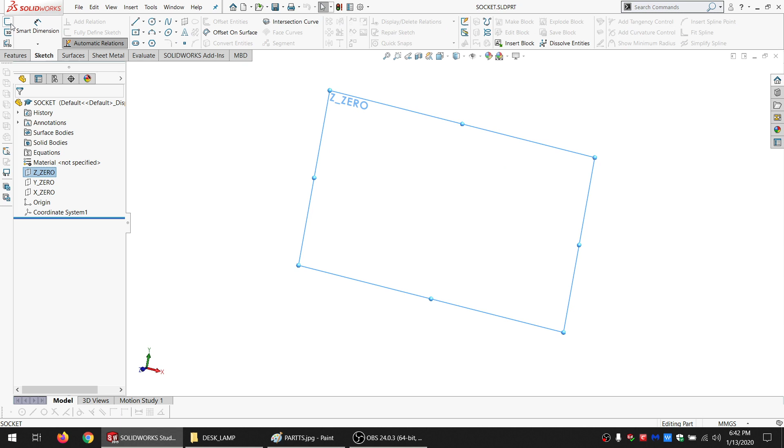This might be sort of a boring video in some ways because you won't see half of it because I don't have a good webcam. But it's obviously round, and it's 35 millimeter diameter on the outside.

And on the inside, how big is it there? It's 28.75.

All right, and gonna just extrude this. I think we go the other way. And how high? 38.6.

And I'm going to put a cap on the end of that. Offset from the surface. Doing this just because that's how calipers work. It's easier to just measure the depth of it.

That's 26.4 deep. Okay, I don't have to get super detailed. I mean, I'm not going to bother putting the threads in there and all that.

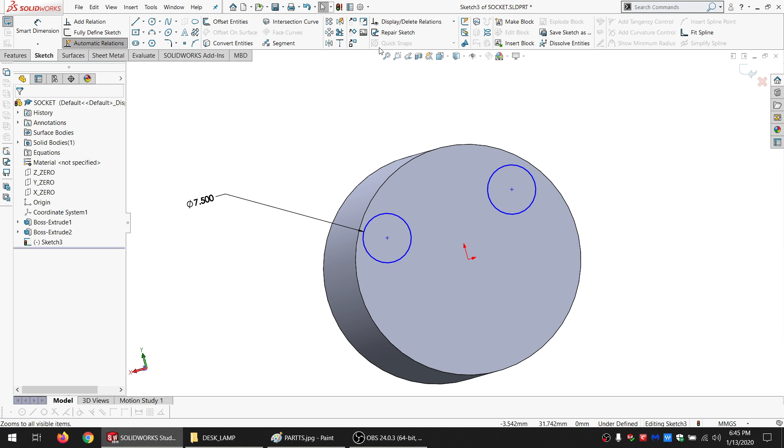And how are they arranged? Really hard to say. No, they're so oddly arranged, I'm not even going to bother with them because honestly, I don't need to model them anyway. If I was going to use this for other things in the future, I'd probably do that, but yeah, there's really no point in modeling that because I don't need it for this project and I only have one of these, so whatever.

So just going to draw the basic shape of the bracket that's coming out of the bottom of it. It's used to actually mount it.

And let's see, I do not have an angle measuring gauge that's going to fit this. It's kind of inset a little bit, yeah.

Sometimes the hardest part of designing something is just measuring it. So how thick is this? 3.32. And how thick is the top? 1.57.

It's parallel, and so it's going to be parallel with that. Okay, and how to model this exactly.

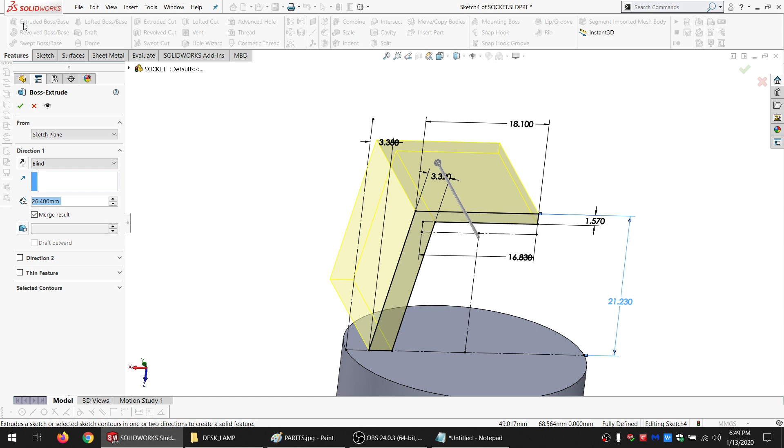Everything turned black, which means it's fully defined. So I'm going to do an extrude boss. The most narrow part of this is 8.6 millimeters, and it's going to use a mid plane so that it goes equally in both directions.

I'm going to go up here and make a circle. I can show this sketch so I can use what I had here, so I'm just going to convert that whole thing and make it for construction. I can use coincident, coincident, and coincident. That's the overall outside bit of it, and I can just do an extrude boss up to here. That's pretty much the shape.

I'm going to trim it—it's actually rounded at the end here, so I can just convert this whole face and make this coradial, and then start trimming and get rid of that, and make that coradial again. If I do this right now, I think SolidWorks is going to freak out because it's zero thickness right there.

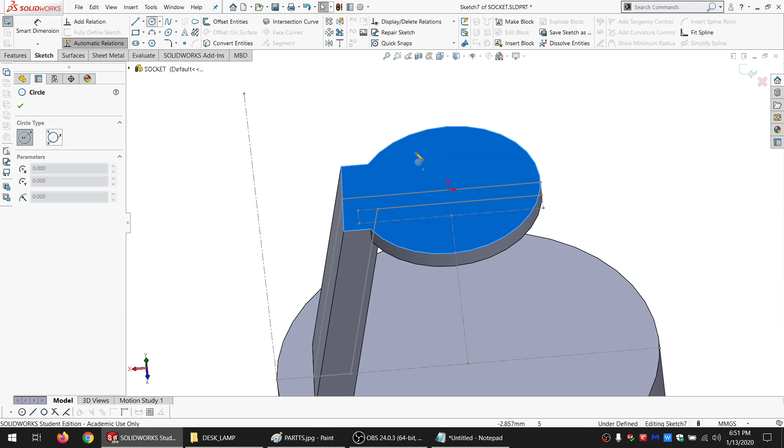Then on this surface, there's another raised section that's got threads. That's centered. How big is it? It is 9.71. And it's not actually completely round—it's flat on each side, which I could just make a round hole, but I might want to actually use that.

So I'm just going to draw this in and make it for construction. Basically I just want to take down my measurements at the moment, and then I'll worry about what I actually want to make useful lines out of. So it's 0.44 wide there. Basically, if we take the trim tool, trim that, and put those back in.

And then there's also a hole through the center of it, and it's 6.4. Then we just have to see how tall it is—0.66. Okay, so that's what that is. That hole also continues through, so I'll go ahead and do that too.

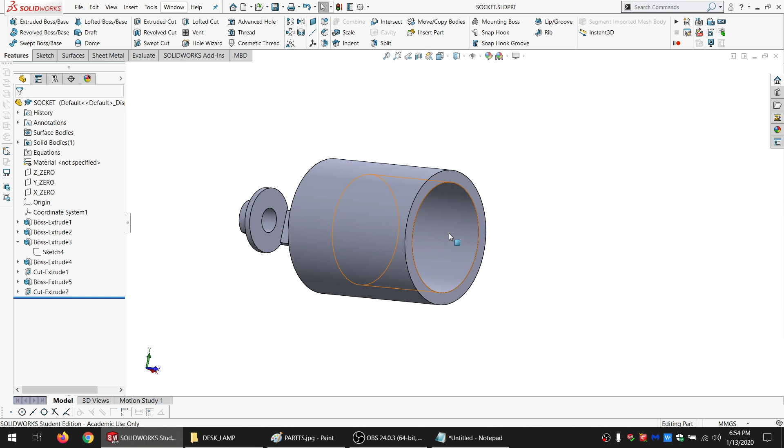I'm going to include the light bulb right in here because, frankly, that saves me the trouble of modeling the threads and figuring out how deep the light bulb is supposed to go into this particular socket and all that stuff. If I draw on this plane, which I modeled all centered around the origin, that makes it easy—I don't have to make extra planes for this. I can just kind of draw out the shape of the light bulb.

I'm going to start with just the center, kind of a center line of the light bulb, and go over, up, out a little bit, and let's see. Then it looks, just from what I can see, kind of like that, and so it curves out and then it curves back in. So that's very rough, but that's what I'm looking for.

I'm going to put in a couple extra lines for construction right away. This one's going to be actually horizontal—make this horizontal as well. Make this a vertical construction line. Make these equal because it doesn't really matter what they are; I can just pick a random line and make them equal to it. Not always the best practice, but I know that line's going to stay there because I'm not really going to mess with this too much.

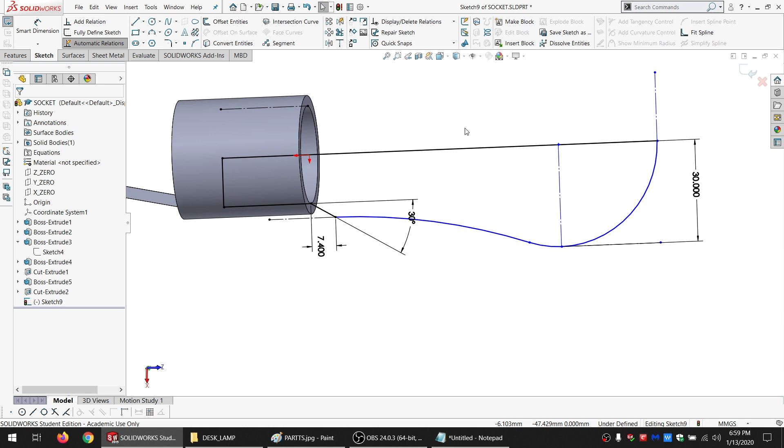And then we should probably have the entire height of the bulb, which I'll take out of the socket for that. And it's about 86 1/4.

And then that's fully modeled. So I select the center line, go to revolve boss base, and I'm going to not merge this. I have it as two pieces in case I'm going to separate them later. Maybe I'll pick a different bulb, but I think I'll go with this bulb.

So yeah, that's basically what I'm going to be putting in. But in addition, let me go ahead and save. Down here, this is actually threaded, but I didn't model it that way because there's really no point. I just need to know how big of a hole to make for it to go through. But I am going to model up the nut, and that way I can at least remember to deal with that.

So I can just make a polygon, 6-sided, and grab the inside circle, and that will be the distance of the flats, which is easy to measure. 13.81.

And we'll center it, and just say horizontal, good enough. I'm actually going to start it from here, but I'm going to go the other way. And it is 3 thick. And I don't want to merge this.

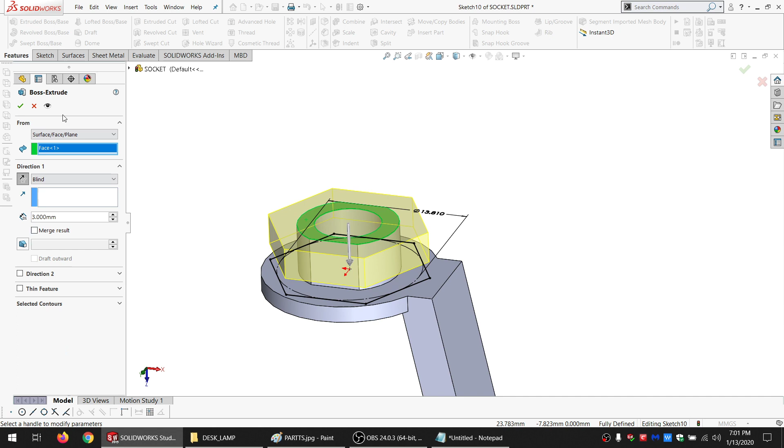And okay, then I'm going to go back in the sketch because I noticed that I only did the outside. I need the hole in the nut too. So again, not going to bother making it threaded or anything, just good enough for the modeling. That's all that really matters on this.

There's also a washer, but it's thin, and I don't even know if I'll end up using that. So I'm happy enough with that. I'm going to rename it.

Okay, so got our inputs. Might still need to do a measurement or two on the cord for a hole to slide it through later, but that's good enough for the time being.

So now I have to figure out how I want to use this. For starters, I'm going to make a new part, and I'm going to save it right away. Call it—I like to always go ahead and start putting version numbers when it might be something that gets changed a few times.

And I'm going to insert part. This is kind of like an assembly the way this works, but not exactly. But it references that other part, unless if I right click here, click external references, I can either lock it or break it, or I could just—yeah, there we go. But for now I'm just going to leave it.

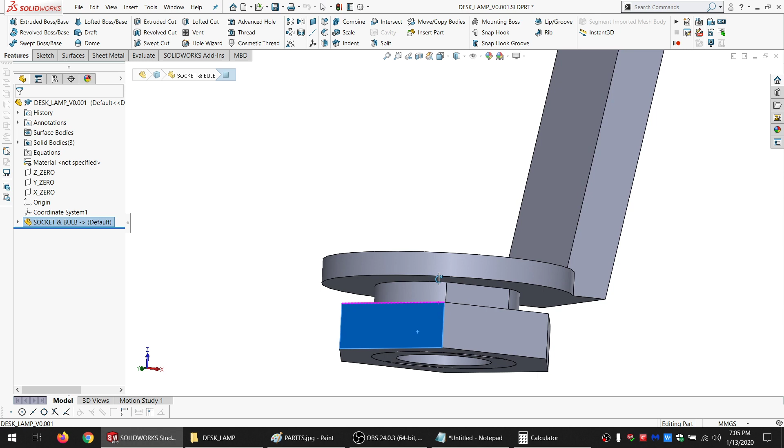So how thick is it, how much distance do we have? We don't have a whole lot, so that might be tricky. Let's see, 6.4... I like to work metric, but 6.4 is just a little more than a quarter inch, I believe. So it's just a little bit over a quarter inch. So if this nut doesn't go on because my material is too thick, that's not a big deal, because I can just run a quarter-20 screw through there with this and use that instead.

So let's start modeling here. I'll do a sketch in this plane. At this point I have to start deciding: do I want it to be square, or circular? Circular gets a little hairy sometimes, and if I want flat sides but not square, especially with laser cutting, which this is going to be, it gets a little iffy. With the fingers, they don't have that problem—they're always cut at 90 degrees because that's the only way you can cut things on a laser, so they don't fit well if you've got angles that aren't 90 degrees.

But at the same time, I don't want this to be just a boring square. So, you know what, let's make it a lucky... and horizontal. Actually, I take that back—7 is not a great number for divisibility, 9 is a good number for divisibility. Let's just pick a random one and make it horizontal so it can lock down later.

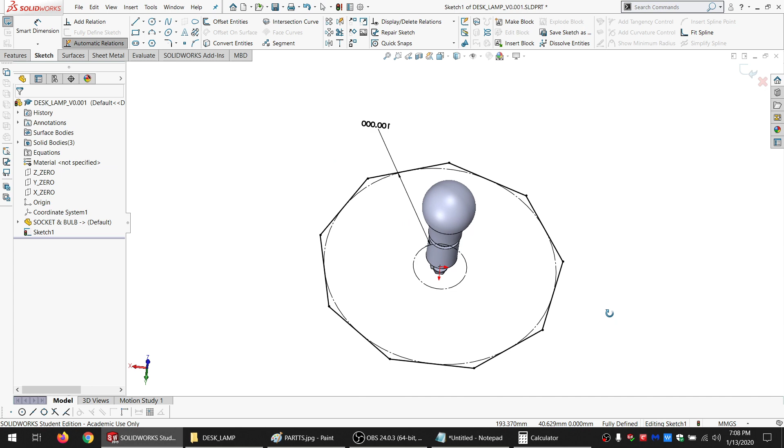But why not? Let's make it a little bit bigger—a lot bigger, why not? 260, which is a little over 10 inches if you prefer. Yeah, I think that should come out well.

I'm going to grab these 4 parts and do an intersection curve, so I get that shape for the center, and can add things into the sides later, but we'll just go ahead and extrude this for now, set equal to wood thickness, and I don't want to merge it. And it's not happy—even though it generated the syntax of that equation, it's still not happy.

Why is that? Because sometimes SolidWorks just does that. So I'm going to save, close SolidWorks, and then open SolidWorks again, and basically hope that error didn't mess up my part. That happens sometimes. Come on, SolidWorks, you can do it. Let's see if it lets me do it now. Syntax is incorrect, which it's generating the syntax for me, and it's perfectly fine—it's just giving me an error for no good reason. Hooray.

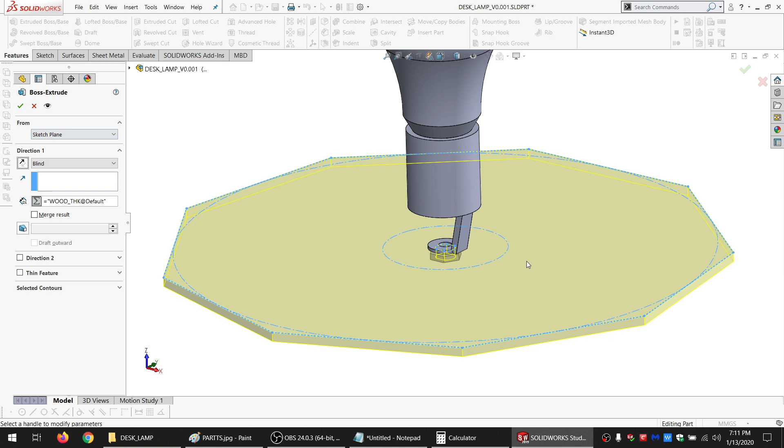Try removing the external references—sometimes that fixes it. Do a few control Qs, save, extrude, equals, and then it's happy. Where'd the error come from? I have no idea, but it's gone, and that makes me happy. So this is not merged—wood thickness going down, so it's not interfering with the metal part. I pretty much buried the nut, and as I modeled it, it's as far off as it could be, so that nut's going to be unusable. I'll just have to use a quarter-inch screw with a washer to hold it. That's fine.

Let's see—we want the bulb, ideally, to be about midway up the lamp. That seems logical anyway. So how do we make the center of the bulb midway up the lamp? What we can do is use planes. We want this to be parallel and tangent, and then make another plane that's also parallel and tangent, but tangent the other way, and then use the two planes together to make a midplane.

So that's halfway up the bulb, or halfway right up at the center of the bulb. And then I'm just going to go ahead and mirror this body.

I want to convert all inner loops, which there's only one, but it's easier than selecting it. And up to surface there, only with that. Okay, and I can change this to mid-height plane and then hide it.

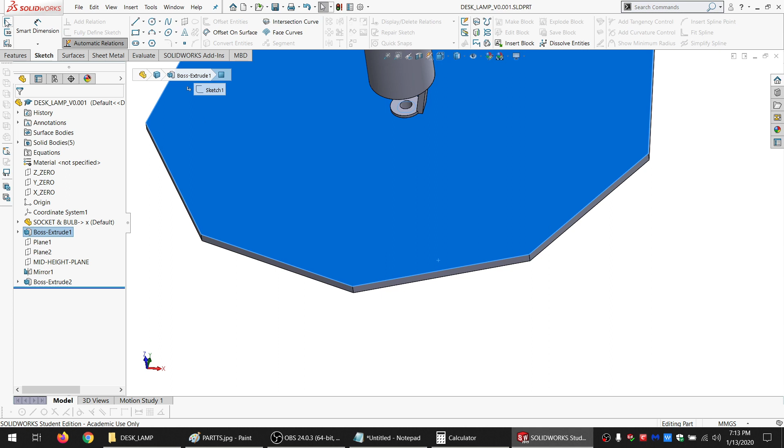So, we have 9 sides, and we need to actually make those sides. And we've got lots of options, and we can kind of say we want to be this style or that.

But let's see, this is the first side, I believe. No, what side is... that's the first side. Might as well start with the side that's nice and straight. Saves a little bit of trouble of using these other ones.

So if we go corner to corner, then it's going to interfere with the one on the next side. So we can do that if we use fingers to lock them together.

Which I probably will use fingers, but there's another little issue with that, is that if I do it right at the edge, then there's nothing holding it in other than friction and maybe some glue. And I prefer to have a little bit of mechanical advantage when I can get it for free. So I'm going to do that.

I'm going to make this wood thick. Yes, I'm going to make that wood thick. I'll put the acrylic in as inserts into the sides.

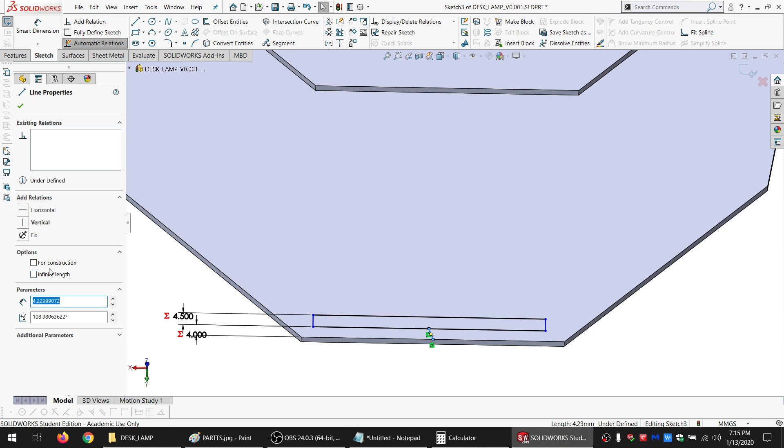Okay, so then this piece that I'm designing, that'll go up to the top. That's inset by the distance that I think is safe. Go center to center. Make this for construction and then perpendicular.

Okay, and then, well, I end up having to make one of these anyway. So make a corner rectangle. Gonna go center to center. Make that as equal. Make these equal. Make these equal, these parallel. And make this perpendicular. And all of this needs to be for construction.

And what I'm going to do with that is I'm going to take this point and merge them. So that will set the width for this piece, which ends up being 91.72, which, you know, I don't need to really worry about how big it actually is because SolidWorks calculated it for me. As long as I can cut it, it's good size.

So I'm going to go up to here, and I'm not going to merge that. Okay, so that's one side, and obviously you'll need 8 other sides, but I'm just going to make this one side how I want all the sides to be, and then we can worry about making the other sides.

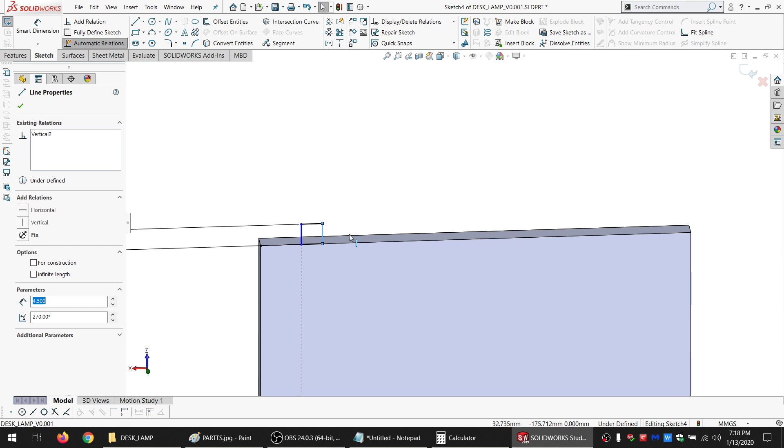I'm going to select the chain and do a linear pattern. I'm just going to grab this edge so it follows it. It was kind of already going, it was almost certainly exactly on that direction, but now I know for certain that it is, as opposed to just assuming.

And let's see, 4.5 times 2 is about 9. So this isn't quite as precise and parametric and all that and adjustable as my last design, because this is more artsy, I guess you could say. Yeah. Hey, 9. This is the 9 lamp now, I guess. Okay.

And there, and we can do one more there. This is for construction, and then equal. And then these two, also for construction, also equal.

Okay, so that's a nice pattern up there. Forgot to grab this one when I did that pattern. So what I do is I grab one of the patterned entities, right click, edit linear pattern, go down to entities to pattern, and I can grab these 4 lines as well.

So top and bottom done, fully defined. I'm going to do an extruded boss up to the other side, and tell it to only merge with that. Okay, so that's set. Now, if I made this just like it was, or with 9 of these around, these would tend to kind of bow and shift and not really fit together well over time.

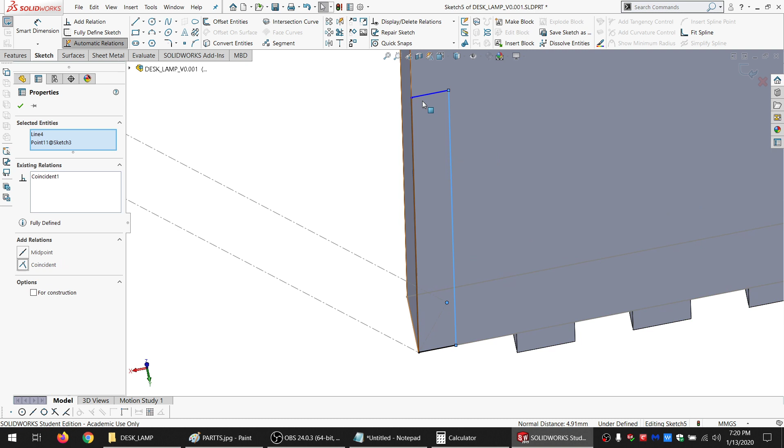So what I'm going to do is bring back the visibility of that sketch. So this is the overlap into here. I'm going to draw on this surface, just quickly draw a rectangle. Oh, I want to grab that edge. There we go. I'm going to grab that there and do a coincident, and then go up to the top and do a coincident.

Just for my own sanity, I'm going to go down here so I can see this on both sides nice and easy. Oh, did I grab the right thing? No, I did not grab the right thing. Equals. Okay.

So, hide this again. Inside of here, that's where fingers are going to be. Basically, on this side, I want to cut out to match on this side when it's not a cutout. I'm going to go ahead and make these all for construction right away.

So let's say I go, I can't do the same method I did over here. I need this part to be a little bit more parametric. So how do I do that?

First of all, I grab this and just call it a driven dimension, and I can give it a name. That name, let's say, is invert. Good enough. And I'm going to exit the sketch and rename it to scale 1, whatever. If I was inside of a corporation doing this, I'm sure I'd be following much better procedures, but hey, I'm not, so hooray.

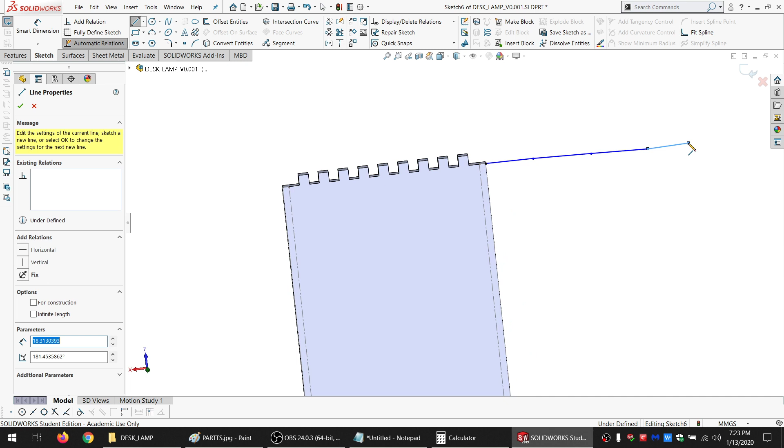So kind of like I did the other day, I might not even need all these, but I'll just draw in a bunch of them real quick. I do parallel, equal, and coincident, so they're all like that. And yeah, 25 works, whatever. And then I'm going to do a bunch of these lines.

Just to do the math, kind of like we did on the cube. Oh, didn't want to grab the dimension. I want parallel, perpendicular. Okay, so what's this first one? This first one is going to be equal to that divided by wood thickness. So if we made them all perfectly square, that's how many we'd have room for.

So let's do another one. This is going to be equal to this minus 1 divided by 2. And we're going to do a third one. It's going to be equal to int, which is just round down to the nearest integer of that.

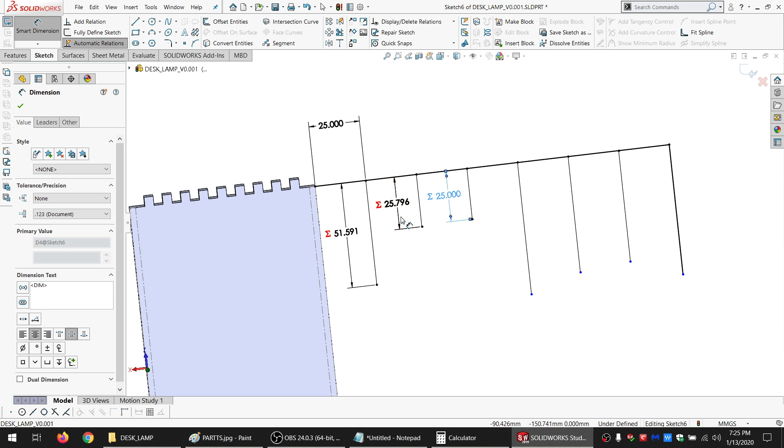I'm going to get rid of this minus 1. It ends up being the same number here, but it would be a little bit different if our dimensions were different, which once I type in the actual wood thickness, once I measure it, it probably will be different. So I can give this a name, I believe. Doesn't want me to give it a name. There, we can give it a name there. And what can I call this? Half finger count. Okay.

Okay, and I'm going to get out of here, rename this to SKEL2, and make another new sketch.

And this one, I've got that, and I've got that, thereabouts, coincident, coincident, and I want to be coincident with those. I want to be coincident with here. And I want these two to be equal.

Okay, so now I'm going to make a formula. This is our total height. So I'm going to go equals to this, divided by this plus this. Basically times 2, but I can just do addition because it's only 2. Either way works.

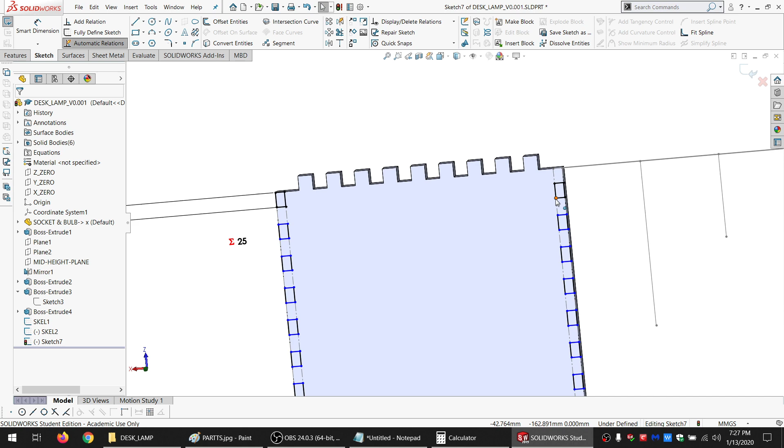So we can do a coincident there. So if we go down to the bottom, it should line up about perfectly. Let's see, if we select both of them, normal distance 0. Okay.

So then we can do features, extruded cut, through all, and then just on that part. And let's hide these two sketches. And hide everything, then show everything.

And I want to make an axis just for the very center. We'll name it center. And I'm going to drop it way down, way up at the front. And then I want circular pattern. I want 9, and I want to select bodies and that. And okay, that looks good to me. Okay.

Okay, so we've got the sides, we've got the top, we've got the bottom, at least the bottom of the light part. We still need some kind of a base or feet or something like that. But we've got a good start.

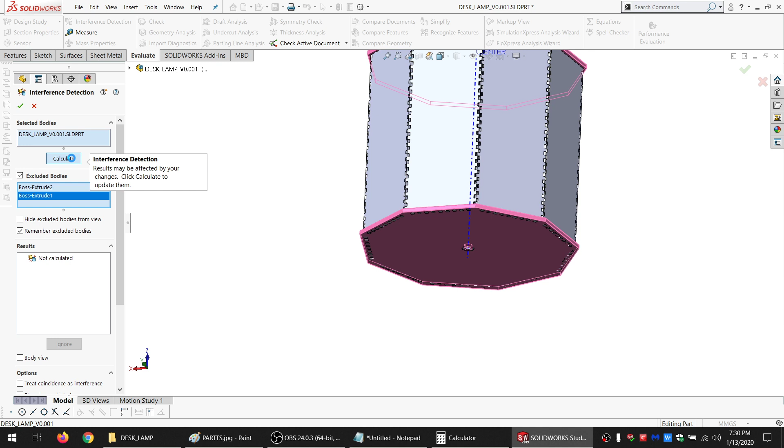Go to evaluate, interference detection. And let's see, I want to exclude bodies, which would be this and that. And then let's calculate. And no interferences. So these are super tight. I mean, they're line on line, but they're not interfering, which is good.

Now let's see, which one was our first one? This one was the first one. So I'm going to make a copy of that. And let's see, this one, I want to hide the original, keep the copy, roll this forward.

And I'm just going to copy all of them again. Actually, yeah, I'm going to copy them all again. Just think for a second about using a sketch to do this, but if I used a sketch to do what I'm about to do, then any changes to the number of fingers would mess it all up. This will be a lot more resilient.

So I'm going to do a combine, subtract. And I'm just going to start going around, selecting them, since I have two on top of each other on all these faces, some of these don't look like they're necessarily highlighted, but you can still see that they are. Or it's just not the one that it's wanting to show that's highlighted. I'm going to do the subtract on that.

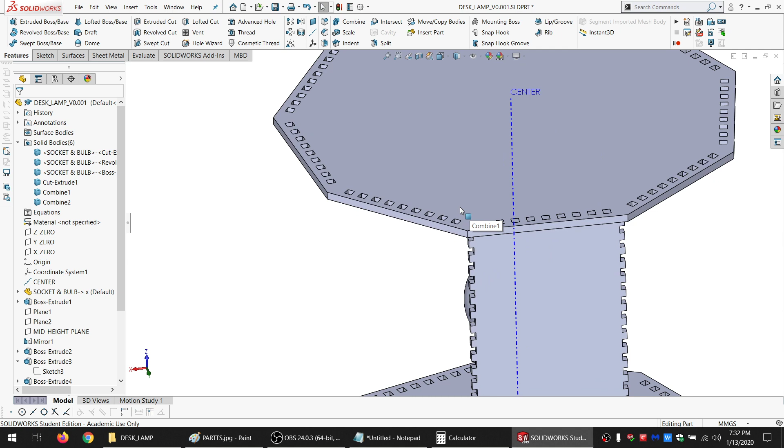Well, because I wanted to make these cuts, and I don't want the chamfers to be on there when I'm making the cuts, because then we'll still have a piece right there, which wouldn't be ideal. So I'm going to save again, because I don't save enough. I'm going to hide the center, because it bothers me, because I'm weird like that.

So how are we going to hold this on? I already figured out I'm going to use a quarter 20 bolt, and I can't really put it in from the top. I'm going to have to put it in through the bottom, and I normally do everything in metric, so I don't have a whole lot of hardware available that's English stuff. But I do have some.

Quarter 20. So I just have a kind of a library of parts that I made for myself over the years. This is one of the ones that is very old, probably 2 or 3 years old, that I was still using this way of modeling.

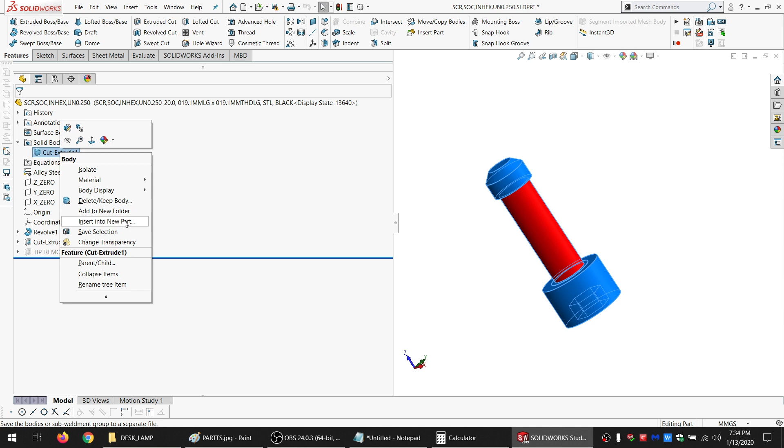So this is a huge file. I stopped modeling this way because it ended up with files that are too big. So instead of putting this into the file we're working on, I'm just going to insert this body into a new part.

This was 19 millimeter. Yeah, good enough. I'm going to do external references and break the link. And click save, and click save all. And this is why I stopped modeling in the old way.

So I'm going to let this run for who knows how long, and then I'll pick up the recording once that's done, because I don't think you want to sit here waiting for it.

Okay, and I'm back. So got a screw, let's drop that there. And I also went ahead and just got a lock nut. Just download it from McMaster-Carr and yank the threads out of it. I don't like to put actual model threads and stuff because it just wastes so much computing power.

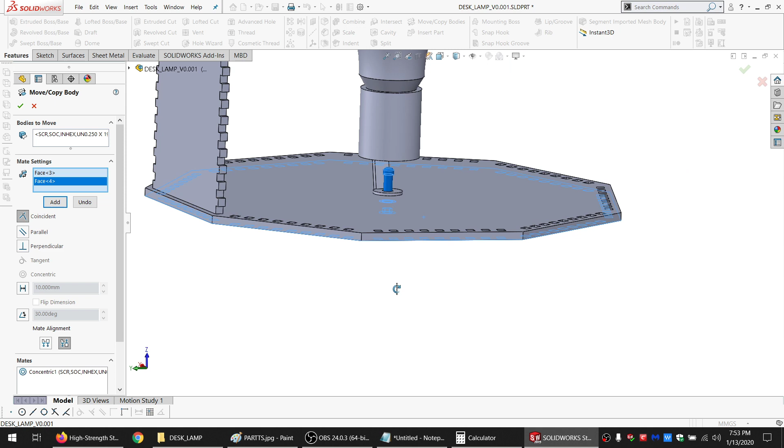Actually, I'm going to cancel that because I want some kind of a washer. So I need a washer that is at least, what, 9.71, so about 3/8 inch inside diameter.

I'll probably just pull something out of my parts bin, but just to get a rough idea of what this should be. OD is all over the place. Looks like 875 to 1 is the most common, either 875 or 1.

So black oxide usually is the most common size because they usually only have 1. So yeah, I'll call it 0.875. And I'll just draw it in.

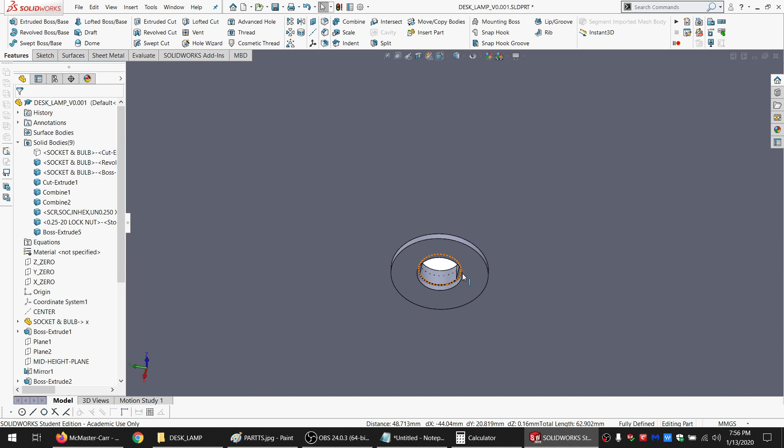So I'm going to figure on the high side, which is 0.06 inches. And I don't want to merge that. Okay, so let's hide this for a second. And we don't need that, we're not going to be using that.

So I just want to make sure everything looks like it will fit. Okay, and yeah, I think that'll work. So now I can do the move copy body on this.

Do a concentric and then a coincident. And yeah, doesn't matter how it's rotated. Do the same thing for this.

This one doesn't really need a washer. I might end up putting a lock washer when I actually assemble it, but for modeling purposes it doesn't really make any difference here. And looks like that went upside down, so we reverse it.

And it's inside the bulb, so we get out of there, hide the bulb, and we can edit this again. So we've got our concentric, but now we need our coincident. Okay, and let's see, does that have an issue?

Just to make sure this rotates, I'm going to do a parallel on that. So yeah, the point doesn't quite touch. Goes through - that actually works out pretty well.

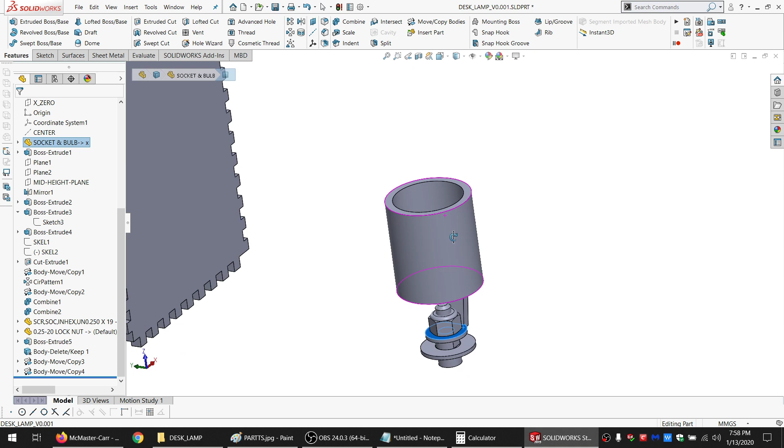That hole through the center of this bracket, I think that's intended for wires, but the wires I have are too thick for it anyway, so might as well use it for mounting instead.

Okay, so that's attached. Still needs some kind of feet or base or something like that. And I'm not exactly sure what I'd want to do for that, but I do know I have 9 sides, which is divisible by 3.

And 3 is a good number of feet to have on something, because even if your table's a little bit wonky, or you're putting it on a carpet or whatever, it won't rattle around. So I just need to figure out exactly how I want those 3 to be laid out.

And I think I've got a plane that's just right. Okay, so that's like right in the middle of this. So if I model one up here, then I can do a circular pattern around. So I'm going to do a sketch on this plane, and let's see, start with a very general footy shape, if that's a word.

Okay, let's use this line as a coincident. That'll put it right on this face.

Do I want it to be straight up and down, or do I want it to be angled in and out? I don't want it to be angled like that, even if this was moved in more. I do kind of like the look of that. This is more of a just how do I want it to look kind of deal.

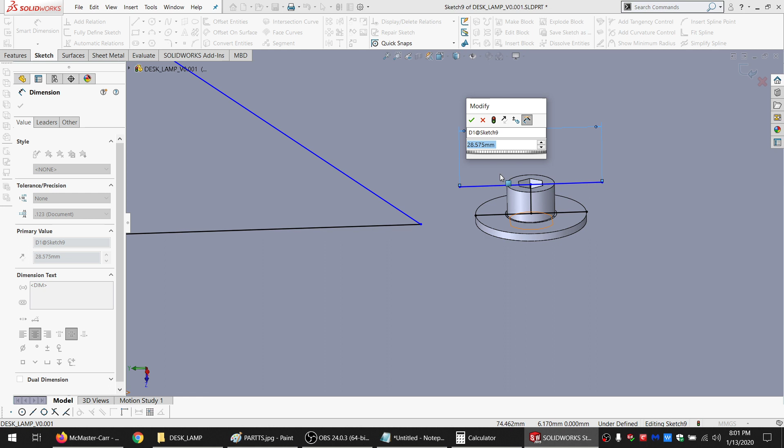Call it 30. That works for me. And then this is all going to be for construction, so do a perpendicular and an equal, and then I can go from there to there, coincident.

And let's make these all for construction now. Okay, so that's going to be the inside of this. And come to think of it, I'm going to want this to come up, and it's going to be vertical. And then I want it to come out.

Do I want it to be straight? I don't think I do want it to be straight. I think I want it to be a little bit more creative than that. So what if it was something like that?

Let's see, do a parallel, equal, and for construction, just so I can go tangent to this. That way it's tangent to horizontal. And how high do I want this wall to be?

Well, I would like it to be maybe 1 millimeter beyond the screw. So I want it to always be covered in screw, even if I end up with a washer that's maybe a little bit thicker.

Okay, now what about the feet? Ideally, I want them to be at least at the outside. It could always go a little bit more outside, but then I'm taking up extra table space. So I'm going to have it right on the outside.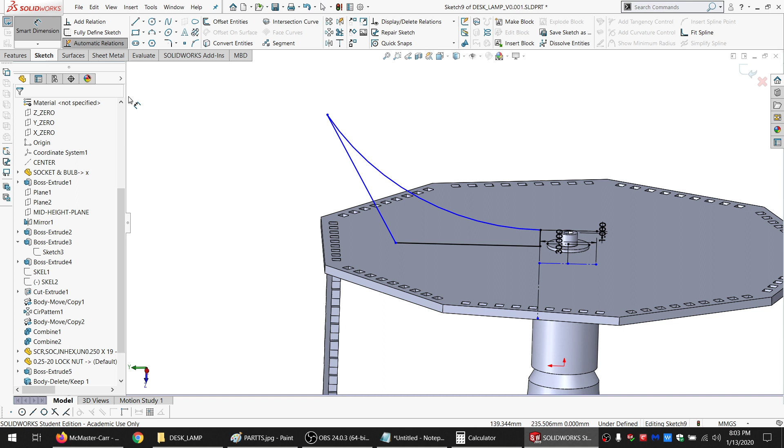How much height do we want to add? Again, this is just kind of opinion, personal desire, whatever you want to call it. I'm going to call it 50 millimeters. Actually, no, I'm not, because I don't want this coming to a point. I want this to be rounded.

So I'm just going to put in an arc and do a tangent and then another tangent. And how big of a radius for a foot do I want? I think, let's see, 3 millimeter radius, 6 millimeter diameter. Yeah, let's go for a 10 millimeter diameter.

Okay, so then if I go, I'm just going to go ahead and convert this so that I've got it, make it for construction. Go like this, and then like that. I don't want it to be on the center, I just want it to be coincident. Go tangent, and for construction perpendicular, and then perpendicular as well.

Okay, so now this will be the bottom of it, and I want that to be 50. Okay, so we're slowly coming together. Now, this coincident I made earlier is pointless because I want it to be tangent here.

Let's see, I could make this curved as well, but I'm actually okay with that being a hard edge there. Maybe. Probably not. Decisions, you know.

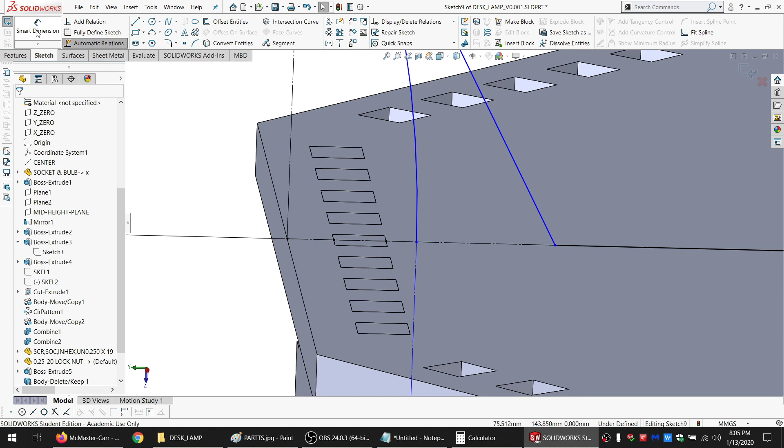So let's just convert that. Some of these might disappear with wood thickness, but the center one should remain. And it did not like that one bit.

Okay, so I can go in to a certain extent, but I can't go. That's interesting. So I'm going to Control Z that. Let's try it from the other end.

Okay. That's interesting. Oh, you know what, I don't want this to be tangent with the line. I want it to be tangent with this.

Can I get away with it now? Probably not. What if I get rid of this entirely? And I'm also going to trim this back. Now can I get away with it? Now I can get away with basically whatever I want.

Okay, so from there to there is safe distance. There we go, and it's just going to go over to here now. Let's see. Make these equal because they don't really matter. Okay, so I've got a basic foot design. I think that can work. I'm going to go ahead and just make that extrusion as it is.

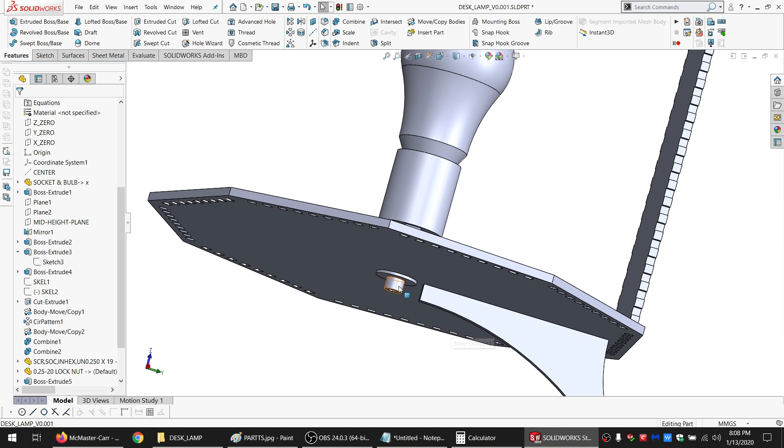And what I'm thinking is maybe I'll use some slots so I can stick it in there with it being a little bit farther outward and then just kind of push it in. Either that or, you know what might be even better if it was the other way.

If I put it in before I put this screw or the screw in the washer in, if I drop it in there and I drop the other two in there and I slide them outwards, and then I have something in the middle that kind of locks them in place, which could just be a laser cut piece. Yeah, I think that could work very well, actually. Especially since then I don't even need the washer, I don't think.

Alright. Let's change this, let's go back a little bit. So let's get rid of these dimensions. Since I'm not going to buy this washer, I am going to laser cut this so I can make it exactly the size that I want it to be. And let's see, let's hide that.

Alright. And just how much do we want? Let's say, I don't know, 10 millimeters. Nice round number, okay. And how thick is it? Well, it's made out of wood, so it's wood thick.

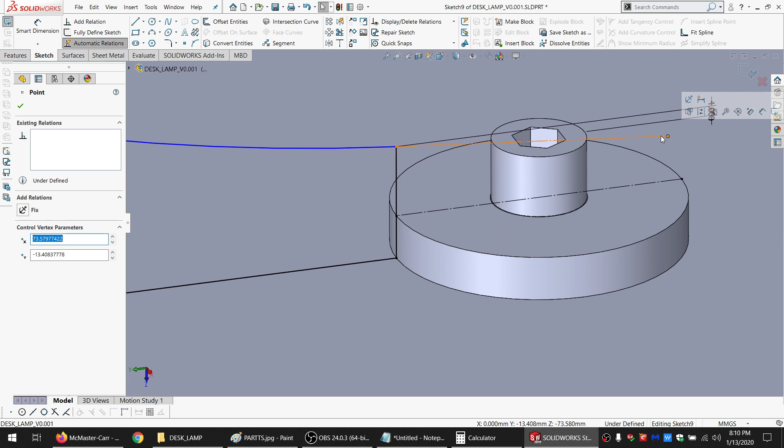Alright, and we can get rid of this whole mess right here. Or, no, not that mess. We can get rid of this mess. Yes, we don't want that. We don't want that, we don't want that. We want this to be coincident with that, and we want this to be perpendicular. And this just parallel, equal, and we're fully defined again.

So now we've got that wood thing that locks in. Alright, I think we've got the start of a winner here. Hide, hide, save again before I forget again.

So now I need some tabs here. Don't need a whole bunch of them, but basically I want to go like that, that, that, that, that, and that. And maybe only 2 or 3 of those.

Go parallel, go parallel, and then perpendicular. Okay, and this is going to be wood thick. And I'm going to make this safe distance times 1.5 just to make it a little bit stronger, since this is kind of going to be under a lot more load.

Right, so this whole thing has to slide in through the hole. So I'm going to make these about equal. I'm going to make this wood thick times 2 here. And just call that equal. 9 millimeters is plenty there.

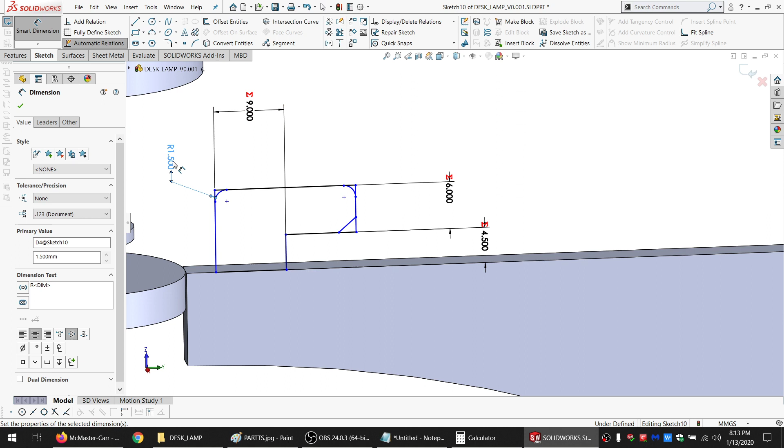That way it doesn't mess with my original lines, which I'll just end up converting those to construction lines. And I could probably use the fillet tool, but whatever. I can also draw them, so I'm going to draw them. That's my priority. And equals, and what's my radius? Say 2, doesn't really matter. Yeah, 1.5, it's 3 millimeter diameter. Good enough. And I might as well make this about the same.

So let's see, there, there, and there, and there. Hide these real quick, or make them for construction so I can grab these. Maybe equal, and it's gonna go like that, so that those can be equal as well. Okay, make all these for construction right now. And I want to keep this, this, this, and these as well. Draw in the remaining lines.

Okay, just for a test, I'm going to do extrude boss. I'm not actually going to do it, just want to make sure it's a nice closed profile before I start patterning it. And just for giggles real quick, that's 18 millimeters across.

So if I go along this direction, the other way, go in that direction, let's see, 18 times 2, 3 of them, 3 fit, okay.

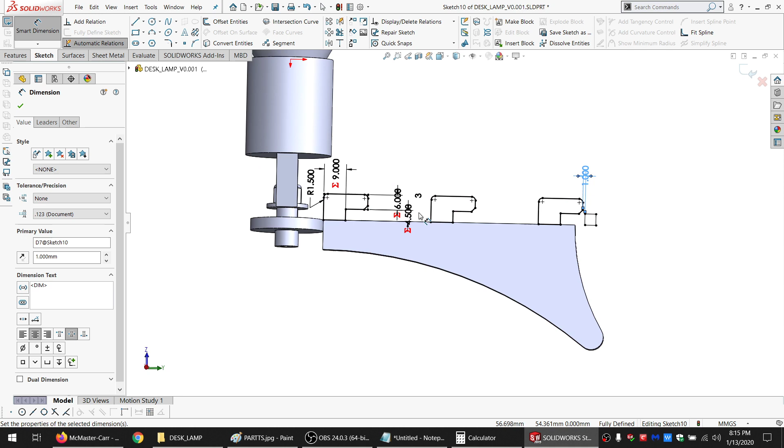So this shoves in, slides out, repeat twice more, then put the washer in, and it locks it in place. And I'm pretty happy with that.

So, extrude boss, up to surface, over there. We only want to merge with this part. Okay.

And good, I think. Might need to still adjust that because we have to put it through the thing. So we can make a cutout right there. That's not a problem. Can't make a cutout right there. That's a problem. So we're gonna have to modify that again.

And coincident. Good. We can bring this in. And let's see.

Let's make a line that's equal to this. And make it for construction real quick. Make another line, and then drop down. It's going to be for construction and perpendicular. And make those parallel.

And equals safe distance times 1.5. And okay, so these are 18, and the distance between them is a little bit over 18. Okay, that works for me. Let's see how it looks.

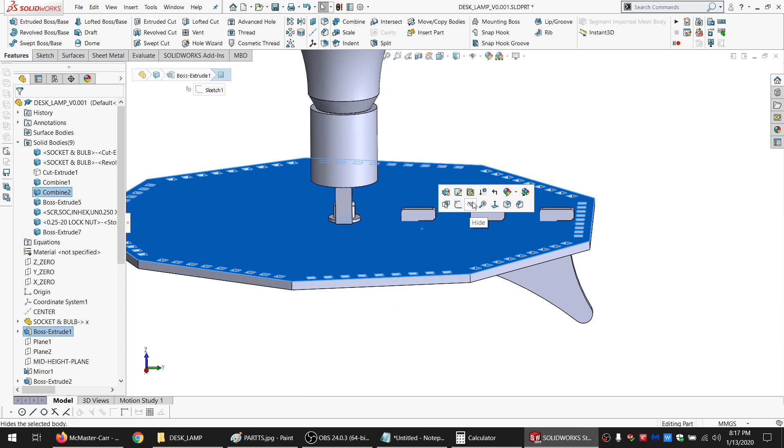All right, let's... gonna make basically just make the cuts, so like this. Could probably pattern these, but why bother?

Remove the verticals. SolidWorks isn't going to freak out too much if I leave them, but during a rebuild, sometimes having unnecessary additional constraints like that will freak it out. So better to just remove them when you remember to. That way you don't have to try to figure out why SolidWorks is freaking out later.

So I want it to be this distance, but I also want to have a little bit of wiggle room, so I'm not trying to force them through. Parallel. These are also for construction, of course. This parallel. I don't need a whole lot extra, just half a millimeter is plenty.

So then I'm going to draw another line on top for the total length. And for construction, equal.

Okay, so I'm going to do an extrude boss. You'll see why in a second. Up to here, and I do not want to merge those. And so I've got these three parts plus that.

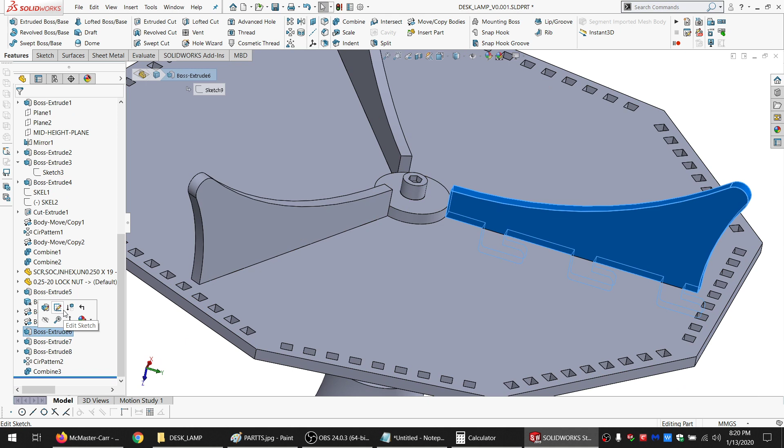And that doesn't... I'm not sure I like that look. I want to modify that just a little bit. Delete that, and I want it to be, well, let me get away with that. It will, okay. Yeah. That works, I think.

Let's go back, just get an idea of the overall look of this thing so far. So, undo this, but it's just to get an idea of what I'm looking at.

So I got a little lamp. It's got 3 legs. It's going to have a power cord coming in the bottom somewhere. Or I suppose it'll come in the back, but might as well come in the bottom. Speaking of which, I might as well figure out how big of a hole I need for that power cord.

Real quick, so pull up the calipers. Still got the cord here. Let's see. Let's roll this back.

So even though all the sides are kind of the same, for now I'm treating this as the front. And since I can't run it through the center, the power cord that is, I'll start with a rectangle. See how wide it is.

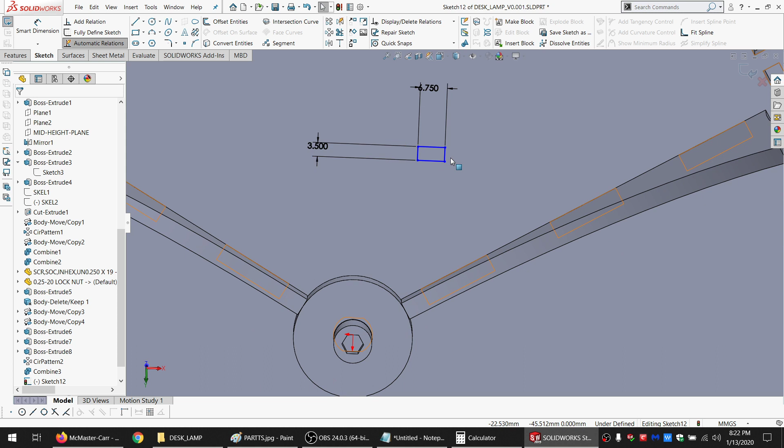And how thick it is. Okay, and its edges are rounded, but not like a slot kind of rounded—it's rounded and flat, rounded and flat. It's kind of an odd shape for this power cord, but I've got it already, and it's plenty powerful enough for the job, so I'm happy dealing with that.

So all I need to do is first make these for construction, and then draw in some new lines right on top of them. Actually, you know what, I'm not going to do that—I'm going to do a 3-point arc, and just do that 4 times.

It's hard to measure the actual dimensions of this cord, but I'll get close anyway. And tangent, tangent. Now with most power cords I just use this straight slot feature, but like I said, it's got straight edges on the sides, which is unusual for a power cord, but whatever.

And I guess it's about... just for rounding everything. For construction equals... and that tells me some of the ones that weren't made tangent yet. Just for giggles, I'm going to fix this real quick. Okay, that tells me that's all constrained, except that I can move it in space, but this as a shape is constrained.

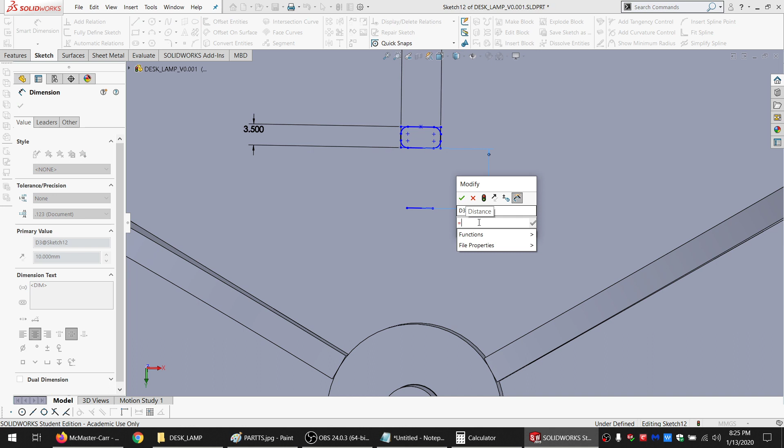And I want this to be for construction and tangent. And there we go, that's all locked down. And it just goes through there.

Okay, so now the power cord goes in there, goes up to there, point, and the power switch is on the cord back here somewhere. Or more likely I'll put a smart bulb in this, and then I can just say—okay, large company that I don't want to say because it'll activate my speaker right now—turn on the light, and then they'll turn on the light.

Okay, so next steps, we need to chamfer these and these to make them easier to assemble.

And I'm going to draw these in and use formulas, because if I just do a manual chamfer and it changes the number of fingers, that screws everything all up. So I'm just going to do the leftmost and the top, and then down here as well.

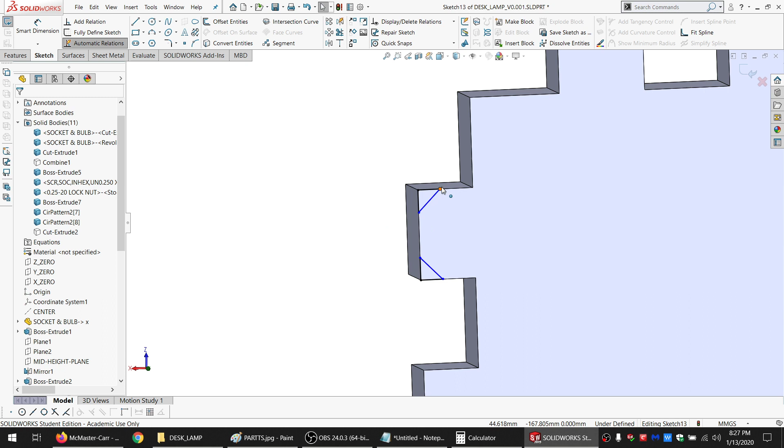Close. And one more set over here. Okay, come on. And that means a new variable.

Okay, and yeah, I made this so that it's always 9, so that's easy enough. My direction, and I want it to be 9 of them. Okay, do a coincident to there, and it's fully defined again.

Then this is going to need an actual formula. So, linear, and I want to go in this direction, the other version of that direction, call it 25 of them, and this was that.

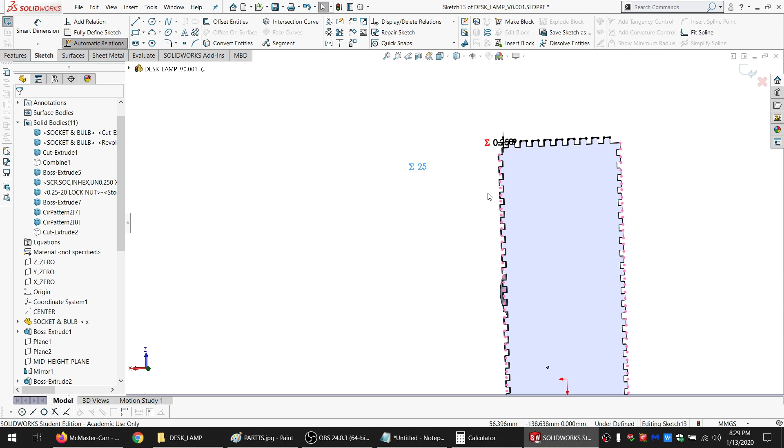Alright, do a coincident there, and I'm fully defined. Good deal. Let's do a cut through all only on this part. And then, yeah, all my edges are chamfered.

Okay, so now I could put this all around. Question is, how does light get out if I do that? I need to make some kind of cuts here, maybe some cuts here, maybe even some cuts in the bottom, so that light can get out.

Originally when I started this, I was thinking I'd use some form of acrylic inset in there. I'm still not sure if I'm going to do that. I could just make cuts that are open without the acrylic. Or, in theory, I could use something like paper also, just glue some paper to the inside and make cuts.

But saying that, I'm looking at this and going, what happens when I need to change the bulb? I'm not going to want to tear this cover off. Once I get that on, I want it to stay on forever. I'm not going to tear the base off either.

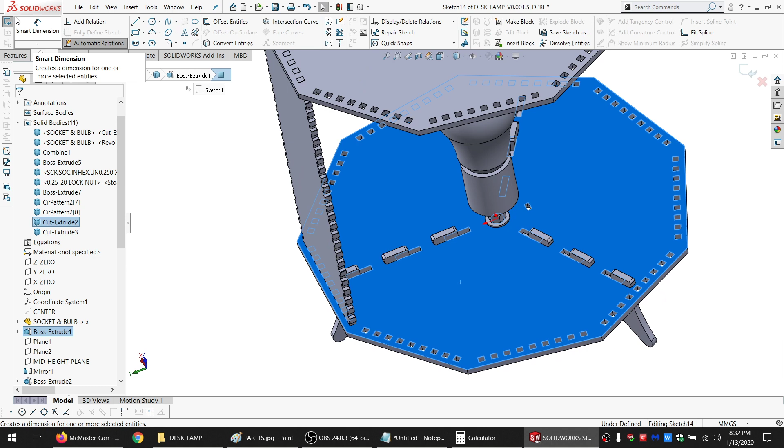So I have to decide how I want the bulb to come out. What I'm thinking is that if I made a hole there, 3 holes, large enough to reach in, that might be good. Let's see if I've got room for that. My rough number is that 100 millimeters is how much you need to get your hand through and actually work. You know what? I have just enough room, I think.

So let's offset this by the default and then change it to safe distance. And then I can make a tangent to that, and to that, and to that. Well, I want it to be the center one. And how big is it then? 107. Okay, so that's enough, even if I do safe distance.

Safe distance times 1.5. I think I still have enough room to work in there. Yeah, it's still a little over 100. So let's make that for construction, and let's put a point and make it coincident with the origin.

Select that point and do a circular pattern around the point. And I want 3, and I want that. And of course it's going to ignore that that point was there. Make it coincident with the origin. Okay.

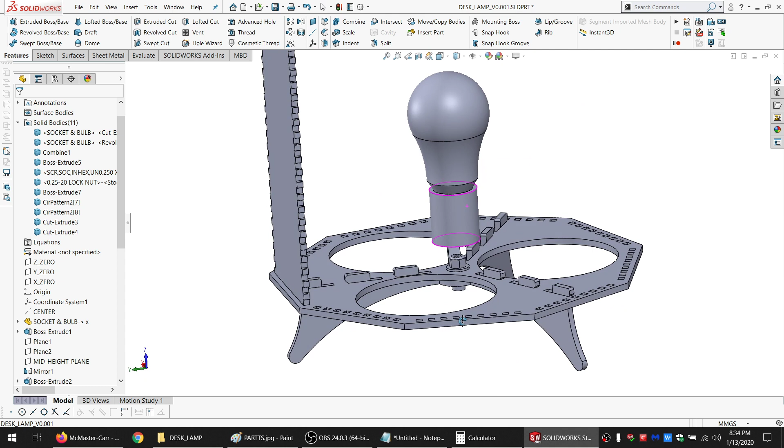What I do mind is that I have 120 volts right there, and a big hole that you can stick your hand in through, which just adds another little layer of complexity to the design that we need to address. But it's not a huge problem. Just keep on working it. So what can I do for that?

Now that's 35 millimeter diameter. It's a little bit too tight to do curved wood. But looks like I'm going to have some big leftover chunks of this wood once I've cut, so maybe I can figure out some kind of thing that builds up around it. You know, stack things up.

Protect it. Ooh, come to think of it though, that is not acceptable, because I also cut off the hole. Suppress this real quick. I also cut that hole right out of existence, didn't I? I sure did.

Alright, so maybe this idea isn't a good one. Not all your ideas are going to work the first time, and some of them you just throw away and try something else.

So how do I get this light bulb in and out? Because I don't want anyone to be able to reach down here, at least not without opening the lamp up, or something like that. So that's a tricky question. If I have cutouts in here, maybe you could reach through, but I'm not sure about that.

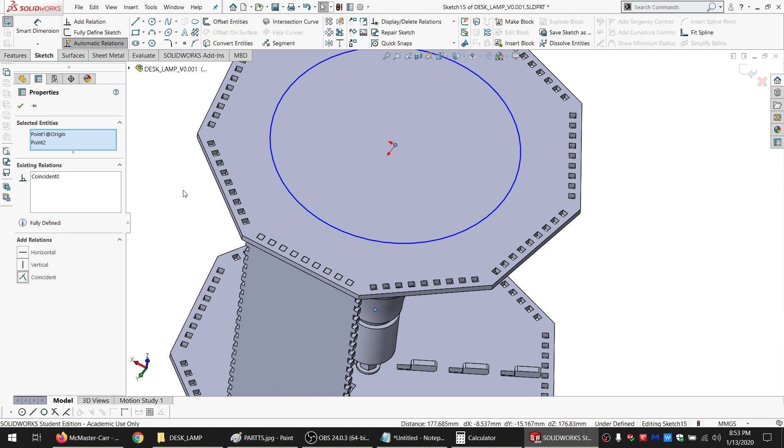Okay, so just spun this around in my head for a little while, thinking of different ways to get in here. And it occurred to me that a lot of lamps, or lamp shades, are just open on the top, and people don't seem to mind that at all. So that's what I'm going to do. Still leaves an issue with the electrical, but I think I've got that solved as well.

Let's offset this. Yep. And I'm gonna do equals safe distance times 3. So that's 12. Yeah, that's actually too little. Just make it 20. 20 is a nice round number.

Tangent. And get rid of that. And so how big is the circle? 200. Very easy to get through. Also makes assembly a little bit easier, so that's a bonus.

So now it's open on the top, which means anyone can just reach in there and grab the 120 volts. They'd have to almost try to, but even still, not ideal. So I need to do something about that. Hide these, just get them out of the way. And I'll do the same thing here.

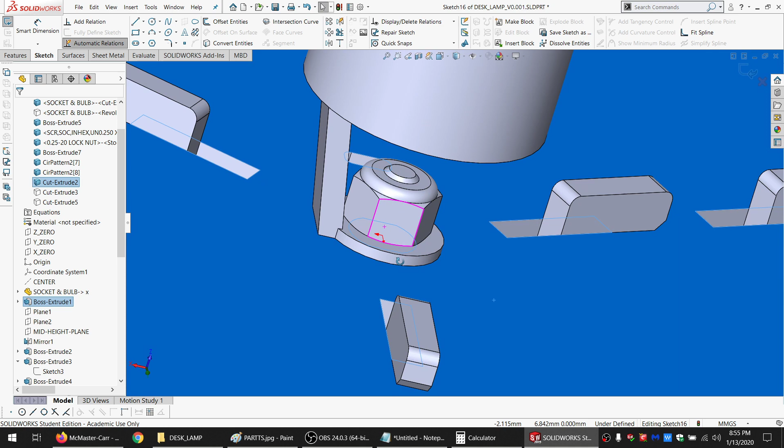So what can I do about that? Well, I can stack up wood pieces that are designed to fit very nicely. And let's see. So first thing I'm going to have to do is account for where that is at, wood thickness, even though wood thickness changes. So I'm actually not going to start there, drawing there. I'm going to start drawing on this one.

And make it perpendicular. I'm going to make it equal to wood thickness. Actually, I'm going to go plus 0.1, just to give myself a little bit of extra breathing room so it slides nice and easy.

So then I can go down here and make a circle that matches that. And then I can make a couple of lines to match that.

Make this parallel and equal. And finish doing what I was doing over here first. Make these perpendicular.

And get out of there, edit my new sketch, and make that coincident. Okay, and then just grab that, coincident. Okay, and then I can trim this out. So that's going to be a hole in the plate that I'm making right now, so that it fits nice around this whole assembly right here.

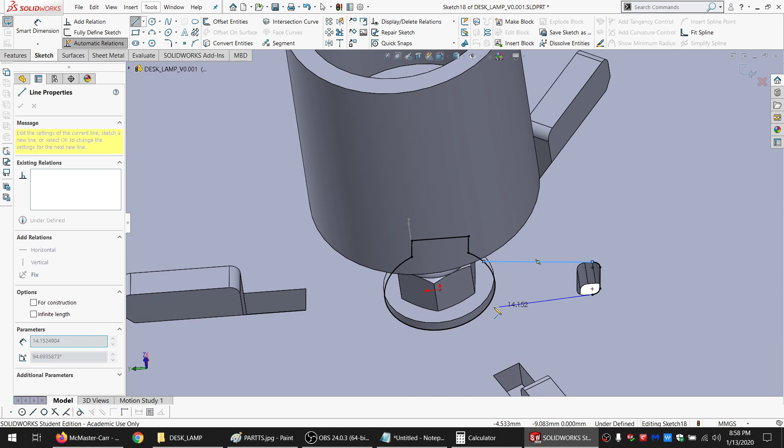So grab just these, convert them, and I'm going to go like that, make these parallel, and then make those parallel as well. And then I'm going to do another trim. There we go. So now I got that hole.

Alright, so I can't just make a circle, because if I make a circle for the outside of this piece, it obviously hits these. But let's see. If I go tangent there, it's too small, so I want to go coincident there. Okay, so that's like my maximum diameter.

Okay, and I want to offset this by, well, by safe distance. That's what it's there for. Okay, so obviously that's too big, because this is already going to be in place when I put it in the feed through. So this is also going to be for construction, because I can't use it, but we are going to use it in a way.

So I'm going to make a 3-point arc, just make it concentric there. That's the same thing as make it equal, but okay, SolidWorks, you're the boss. And then we need to kind of curve it in and then curve it back out. So I need a curve on the inside, and curve it back out.

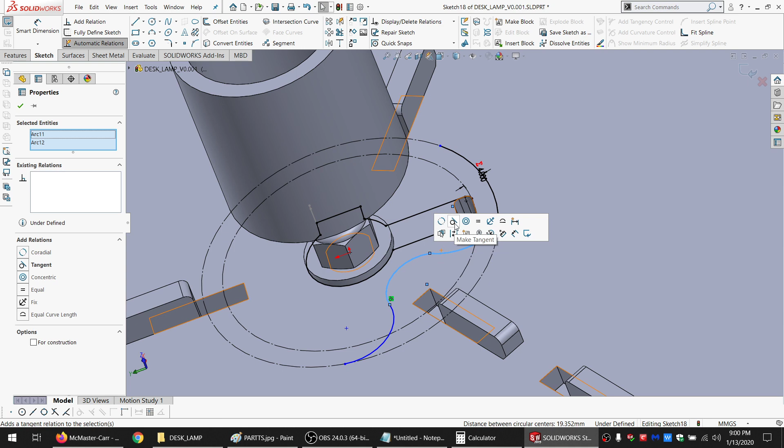And so I'm going to make that tangent. Make these tangent. I'm going to make these tangent. And then I'm going to make this tangent. Okay, now the center of this should be centered with this. So it's not quite getting it.

Midpoint. There we go. For construction, make it parallel here. Okay, that didn't work. Let's drag this manually.

And then just for the moment, let's fix it. What if we do that? Oh, can I drag it? Yeah, it won't let me fix it. Okay, fine, I will make a temporary dimension, and that should make it happier, maybe? Okay, fine, drag this back so it's almost straight, and then make this parallel, and then I can delete this dimension, and now that's all gravy.

This we also want centered, so I'm going to go from there to the center, midpoint, and make that perpendicular for construction. That broke it again. Okay, fun.

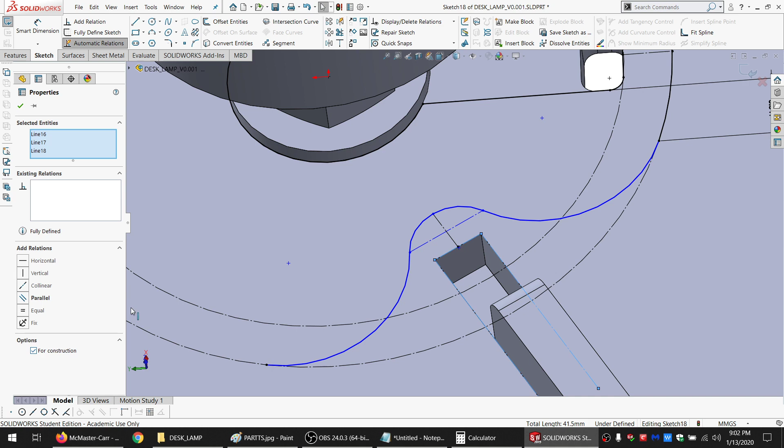A little bit. Actually, you know what, that's not how I want to do this anyway, so just delete this entirely. And let's convert these, select the chain, make it for construction, and then offset it.

Fine. And safe distance. And then just have to decide how I want this to work out. Let's try making these equal. These have to be equal. Well, I'm not sure if that makes a difference.

I think they're already equal. 7.448, 7.448, yeah, my other dimensions are. This is making them equal anyway. So we go coincident there.

And let's make these for construction. Okay, so then we can delete this. And let's see. We want... see, that looks good, but we can still do quite a bit of weirdness here.

Yeah, no matter how I do that, though, it doesn't get onto this one, so that makes things a little bit easier. And let's see, what if we offset this by the safe distance times 1.5?

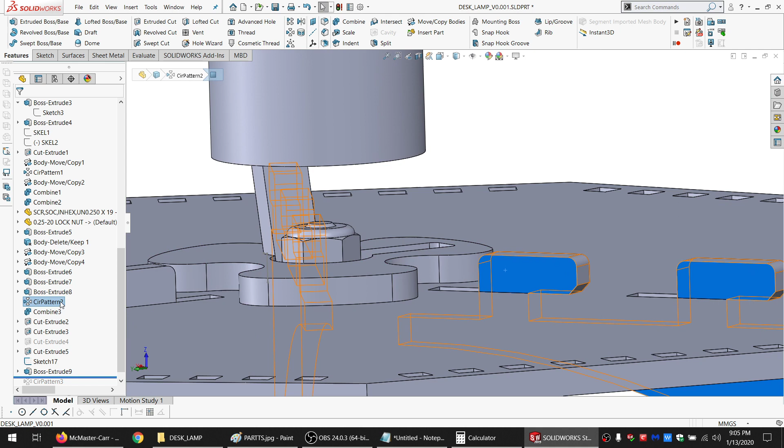So it looks like these are a little bit higher than wood thickness. I forget what I used to define how high those would be. Let me see real quick, roll back. Is it this? Yeah, I think it's just safe distance times 1.5.

Okay, that's fair enough. Just discard that. And down to there. Wait, what is this circular pattern down here again? Was it something that I don't need? Yeah, we'll leave that for now.

Okay, and what's the sketch? We don't need to see that. Alright, so as this comes up, we want it to match this. So we're going to have to make the next one out a little bit more. But first we have to, actually we do need this sketch still.

Because we're going to need a couple more of these just out and out. And parallel equal. And parallel. And coincident. Okay, and I don't know if we need all these, but might as well just draw them in real quick.

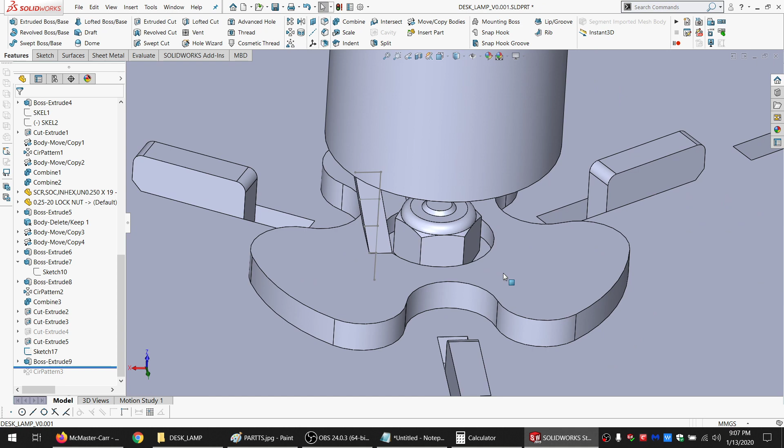Alright, so our second one, we're going to need the circle again. Well, no, we don't need the circle. Excuse me 1 second.

Oh, sorry, scratchy throat. So the second one, we don't want this nut turning. It's in a tough place. So if we can, let's use this next block of wood to actually lock it in place.

So make a coincident or collinear and a collinear and one more collinear, and that should be fully defined there. Grab it. Okay.

And then we also need this. So let's see, just going to put a point on there and do pierce. And do a point right here. And do another pierce.

Make these parallel and equal. And then, let's see, do a coincident. And also want to be, let's see, perpendicular with that.

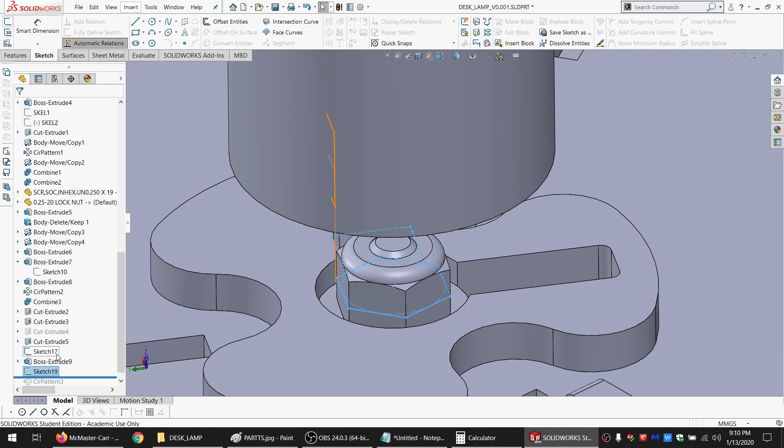And then we still need the wires to be able to come through. Come to think of it, this could have been closed up. And I think it might actually be better if it is closed up, because the next one it's going to have to be closed up too. So, no big deal. Go back, make a little modification.

Those. Make these for construction. This. Fill it in. Oh, come on. Make these concentric. And then I just need two little lines right here. And right here. And hopefully that works. Okay.

Let's do the same thing right here. We want convert entities, select this inner loop. Okay.

And we might want it to be a little bit longer than that. And let's say from here to the midpoint, make this parallel, make these parallel, make these equal, make this a construction, and let's see, we want to mirror these, so we need to, let's see, it's the best way. Go like this, and go like that, make this perpendicular, make both of these for construction.

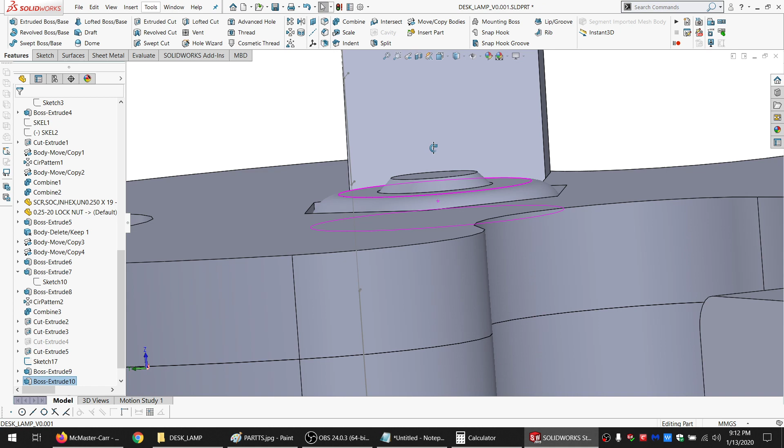So wood thickness, and there we go. That should hold the nut in place. Now this is on the upper side of the wood thickness that I'm likely to have, so the next one's going to need a little bit of clearance for that too. But it doesn't need to hold the nut from turning though. This one's doing the job. In fact, the actual flats on the nut are fully inside of it.

So let's make our next one. This one is where it starts changing. I want the wires to be able to come all the way in. And you know what? Saying that, I want the wires to be able to come in a little more than it anyway. Let's make this slot, actually dimension it to be, say, 10. That way they can really start to curve in already.

Okay, so this next one, we want it to be probably almost the whole radius or the whole diameter. Can we get there? Well, no one's going to be able to reach up and under, and even if they did, that's going to be a small thing that they could barely get to. Yeah, that can work, I think.

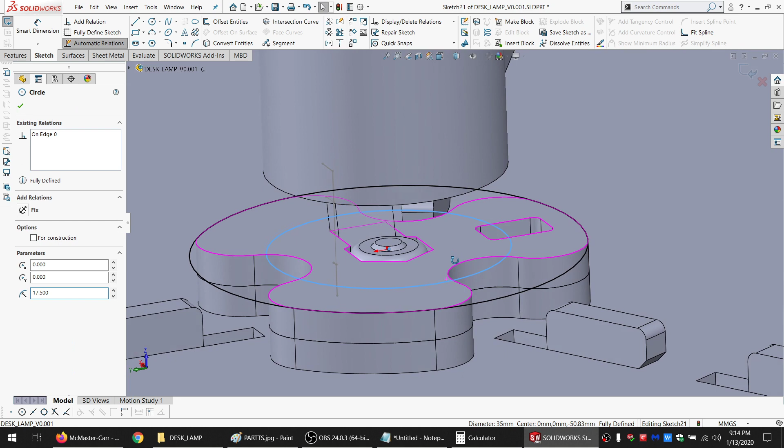So we got a round piece. Just thinking of how it will hold. And yeah, we don't need that. Let's go like that. So we've got a little ring. So everything inside the ring is going to be kept. But then we probably want something going in towards the center also, I think. Yeah, let's make the ring for now. We can add more.

Okay, and let's convert this whole face and then convert this as well. That way we've got these spaces in here. So we want those. Actually, I'm going to delete this again. I want to convert this, and I want to offset this face by 2 maybe? 2 works. Even 3 works maybe? Yeah, I think that works.

Okay, kind of eyeing it, you know, but extrude boss, we want this and this and this and this and this. And then we want to only go with this body here. Alright, so now the wires can come in there, and if we need to, if they're a little bit too long or whatever, you can kind of have a little bit of space to sit in there.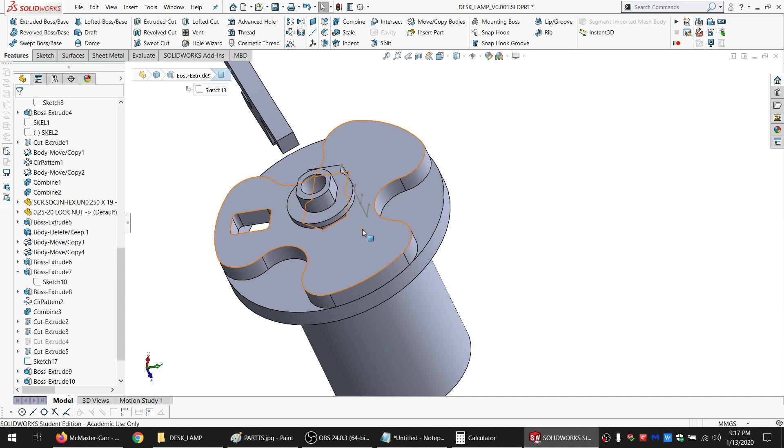So how do we keep this from rotating? Obviously, these pieces will be glued, but how do we keep it from rotating while we're gluing it, or to get it lined up just right? Well, we can, first of all, go ahead and hide some things, get them out of the way.

And hide that too. Let's go sketch, sketch. Let's convert this and do just a tiny little cut, say 0.25 into that. So now, got that little cut out there, and what I'll do is when I laser cut that, I'll just do that bit as an engrave. That way, it will, ooh, we have to fix that. But yeah, this way, if it's engraved like that, then it'll just sit on there while I'm gluing it, and it should be easier to deal with.

I need to deal with this first, right now. So, we've got this as our marker point, and we can just, let's see, come on. And let's see, we wanted this to be parallel and equal and coincident. For this we can just go coincident, and then another coincident with that, and just cut it out of this one.

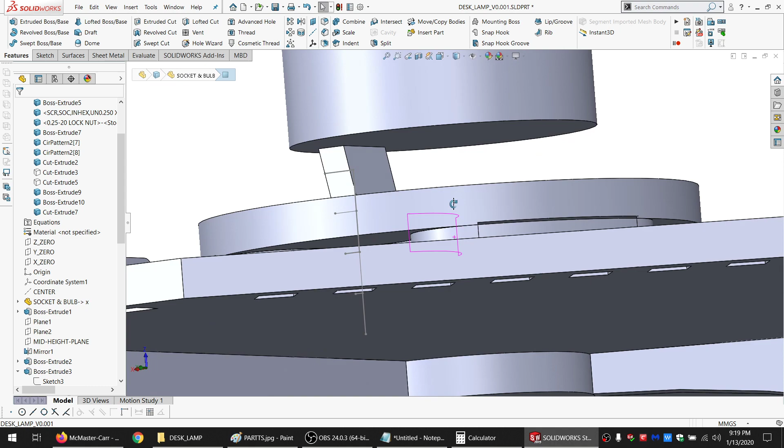Okay, so then the next layer, we can be a little bit more generous with as far as space, because we basically just need, at this point we've curved in the wires, and they just need to be that much space on the inside. So yeah, this one's easier.

Okay, and then do that, and let's see how much distance we've got there between there and there. 1.27, so we've got a stack of 1, 2, 3, 4, 5. So yeah, it should be good. I'm going to do one more just to be 100%. That's not what I want. Mirror from that, and good.

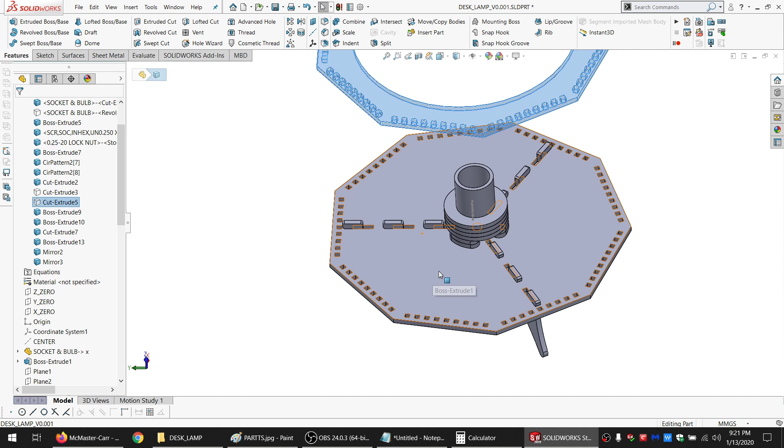All right, so we got the stack of wood bits. So those all get dropped on there, kind of glued together. And these will all be glued together, but they won't be glued to the base plate. They'll be held onto the base plate when that gets screwed down. So, all right. That works. We'll get our bulb back. We don't need this sketch anymore.

So now what we've got, we still have this suppressed circular pattern of the sides, but we need to figure out what we're going to do with the sides, because right now I can get out the top, but not out of the sides.

So my first initial thought when I started this was that I'd have cutouts, roughly rectangular with rounded edges, and put some black translucent acrylic in there, so it looks black when the light's off and when it turns on it looks a little bit yellowy. But that's why I'm thinking that's not what I want, because it's kind of a dull, gross yellow.

It looks really neat if you've got a colored LED behind it, like blue shines through almost perfectly blue, and it's almost like magic because it's just a black surface and then a blue LED behind it when it's on. But this is just going to be a clear white light, and I don't want it getting tinged by the color of the translucent acrylic.

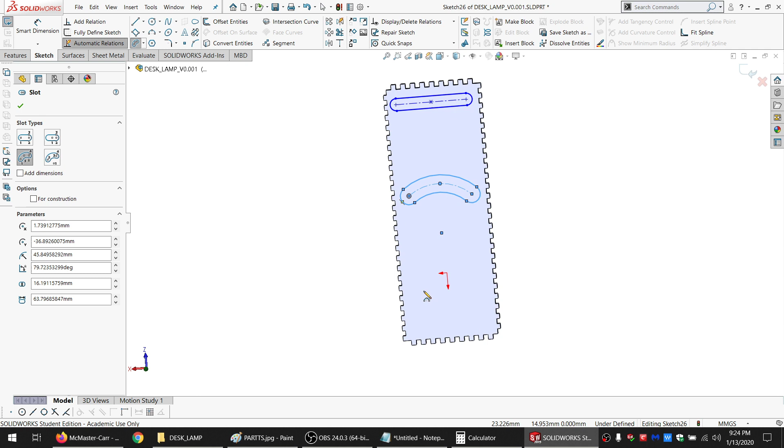And of course I want them to be rounded, like that. Another option is that I could do a series of those, or even a series of those. But I'm not 100% on those, again it gets closer to vertical. Still probably not a huge concern, but I think this will work.

So we go tangent, and I'm going to go collinear. Then I'm going to do, for construction, another slot inside of this. And the one inside is the one that I want.

Let's see, looking down at 40, just doing a little bit of mental math. I don't want them to be too big because, again, you'll be able to see the light bulb directly. Don't want them to be too small. I think 3 is a good in-between.

And how much space do I want between them? It's a good question, but I do know that for this, I want it to be safe distance, because that's what safe distance is all about. And, get out of that, select chain, and then I want to do a linear pattern following this direction, but the other way.

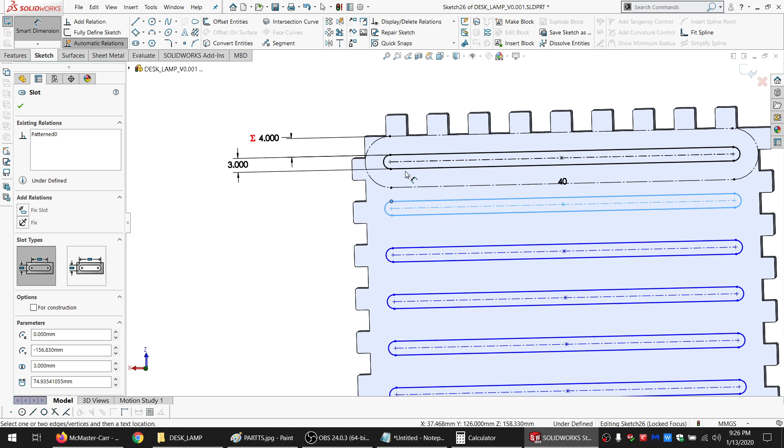And say 50, maybe 40, I don't know, well I can adjust it later. I want how much space — I think just making it equal might be ideal, or thereabouts. I'll have to adjust it a little bit, but just to get an idea of what I'm dealing with.

40, 38. Let's see, 40 divided by 9 is 4, 4 times 9 is 36. Okay, I like 9s, or at least I like when everything matches up, and so far everything about this is 9s, so it's going to be a multiple of 9. Why not, right?

So I'm going to go collinear. I'm going to do for construction for the whole thing, and then I'm just going to make it equal to this one up here. And it's fully defined. Okay, so I've got slots all the way across.

And having done that, I realize I may have removed too much, and it might be a little bit boring — both of which are problems. So what I'm going to do is get out of here, make a new sketch on top of it, because I don't want to mess with the basic geometry, and the pattern and all that are good. It's just I want to make some slight adjustments to how the pattern is laid out. It's 39, which is an odd number, so I can do some interesting things with that.

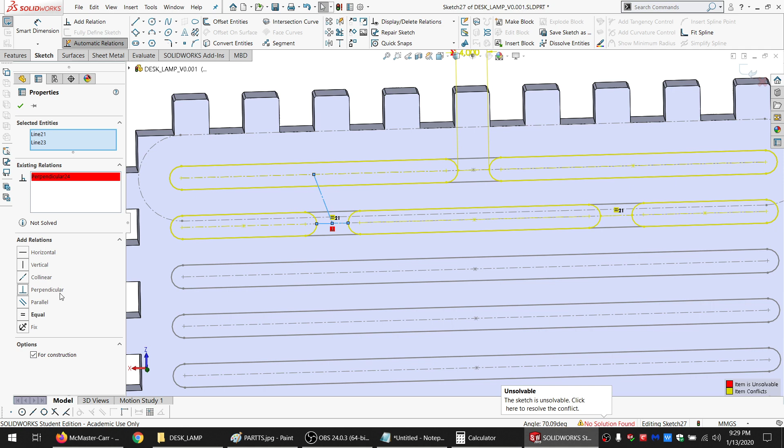Okay, let's see how this looks. Come on. Yeah, you're just gonna give me trouble, aren't you? Well, yeah, it would. No, it's gonna be too long. So what if I go from the center to the center? Different types of center, but they're still centers. Oh, come on now. Come on, let me move. And this I can adjust its length, right? Come on. Midpoint, okay.

Okay, can I do a perpendicular now, please? Okay, for construction again. And then I just need the equal length again. And that's fully defined, good deal.

Alright, so I'm going to select all 5 of these chains. And let's see, 39. What? Oh shoot, it's 36, not 39. Oh well, it's still okay. So half that's 18. And direction 2, just for this, now let's set it to 20 so it's easier to dimension or to make it coincident.

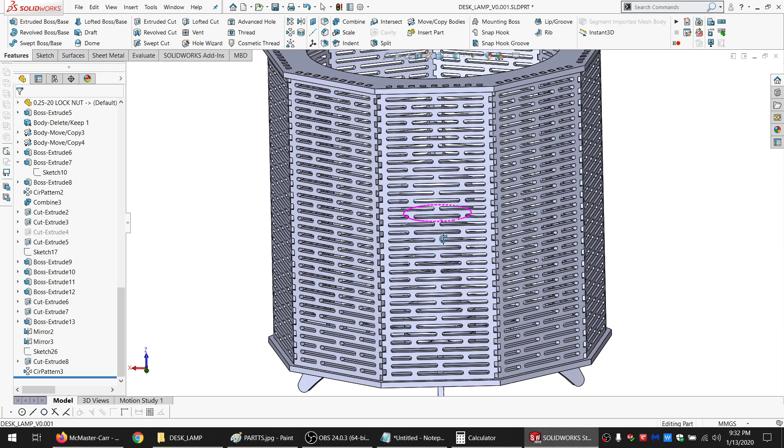All right, and let's show everything again. And then let's do our circular pattern. Okay, so if you imagine the light being on, let's see, you're looking at it like that, you can still see the light bulb, but if you tilt up, let's see, you need to tilt up quite a bit before you don't see the light bulb. At that point, you're almost seeing the light bulb there.

Might need to adjust that still. Let's see. So, this is safe distance, right? Yes. And we probably want safe distance between the openings too, in theory. But 3 is too big, apparently. Maybe a 2.5. Let's see how 2.5 looks once it's all... Let's see. Still quite a bit, you still have to be tilted way up before the light bulb is not seen directly on. Let's try 2.

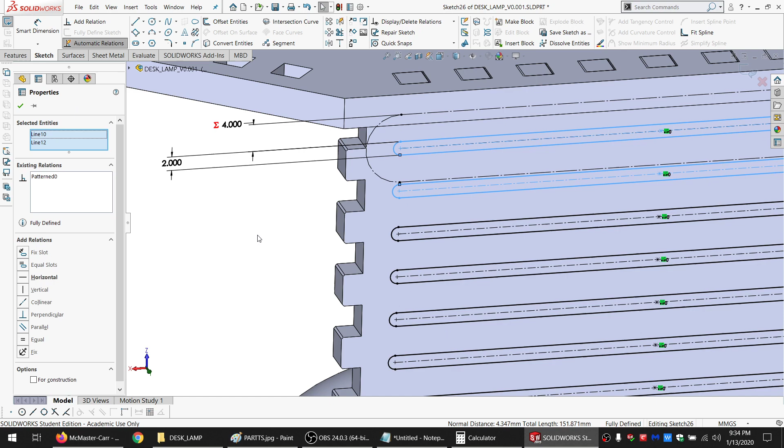So that's 2 for over 4 millimeters. So, yeah, that right about there. It's not too high, I don't think. So yeah, I'm happy with that. And then we need to see how the spacing works. How much space do we have between them at this point? We have 4 between them at this point, which is more than safe distance. See, you can always undo the changes to the sketch if this doesn't look right.

39? Yeah, I'm going to make it 39. Why not? It's not a multiple of 9, but it's a multiple of 3, which is good. So we need to get rid of you. And so then we need to make this, and it's for construction, and it's equal to that. And then let's make it coincident there. Okay, that works.

Then we need to modify this a little bit too. So where's our number? 14. Okay, let's show this again so I get something to work with. And then I need to do one more pattern with this and this. Direction, the other way, good. And then I'll do a coincident down here, just for the last of the 39. That works, fully defined.

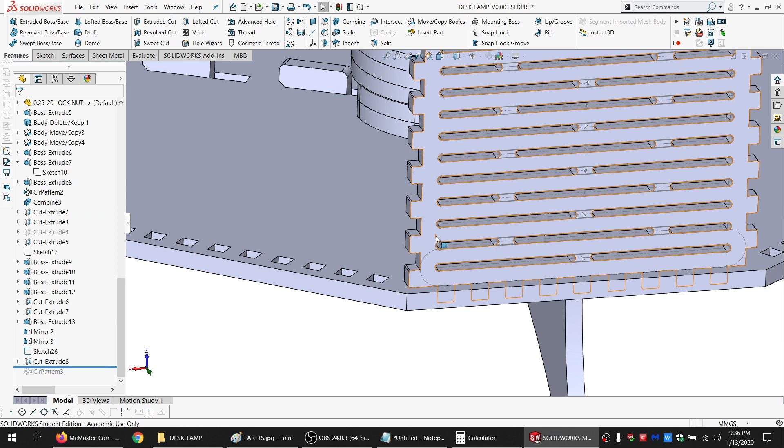And alright, so even more cuts, hooray! But, like I say, it'll make it look a little bit nicer. Alright, I like the look of that. So we got nice legs, got a power cord coming in through the bottom, got things around there to protect it. Yeah, I'm pretty happy with that.

Alright, so I'm going to save this.

Alright, and then I need to start taking care of the kerf. So I guess I'll just start with the first piece here I see in the top. So these are always going to be 9. We decided that, so that makes that easy. Do convert all the insides and just select all of them, and we do an offset. And I can't put an equation in there, so I'm just going to do an offset of 0.1, and then I'm going to reverse the offset. I want to offset inwards. Okay.

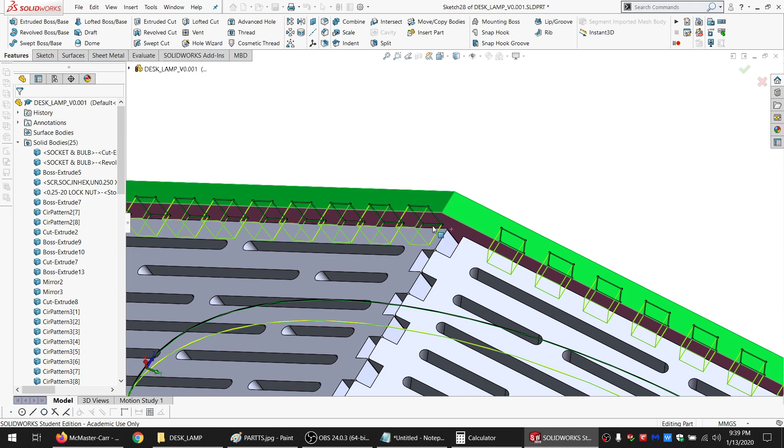And down there as well. Let's see how it looks.

Let's see. Say 20, 30, 40, 30. Yeah, it works.

Do I like that more than the hard edges? I do like that more than the hard edges, so I'm going to do that on the bottom as well.

1, 2, 3. 1, 2, 3. And there.

Okay, I want to put these two before that kerf offset.

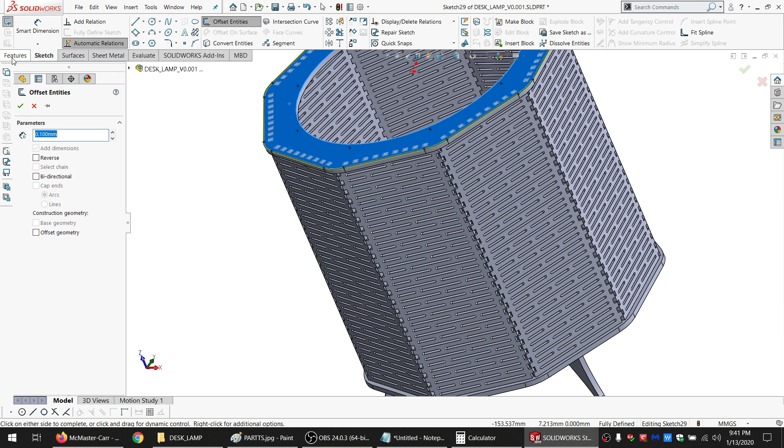And I'm going to do another sketch up here. I'm going to convert, offset, and fine. So I'm going to do kerf equals wood kerf divided by 2.

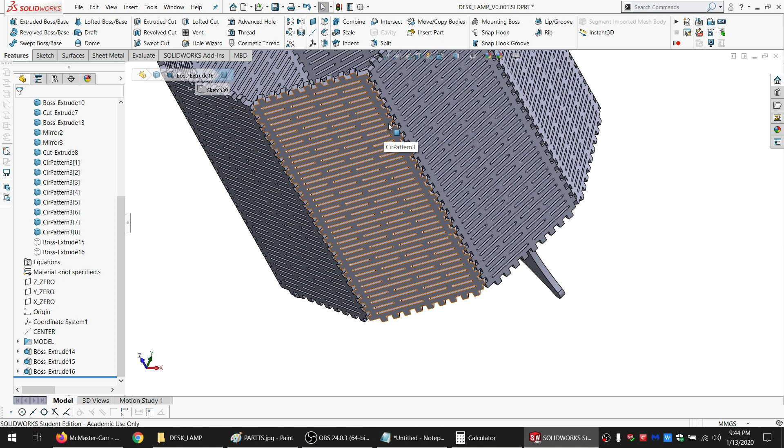I'm only going to do one of these because all 9 of these are the same. So I'm just going to do one, and then I can just cut that same panel 9 times. Only going to do one of these, cut that same thing 9 times.

So I'm going to stop recording at this point because, yeah, basically it's pretty boring from here. It's just the same thing I just did. Only other thing I'll say is once I do all these kerf offsets, I'm going to put all of them into a single folder called kerf.

And then I'm going to lay them all out flat, put all those features into a folder called flat, and then I can measure the thickness of my wood and enter it in here.

Come to think of it, I don't need those anymore. And yeah, then I can just regen from that, do a Control Q to regen, and I'll be able to export a DXF and laser cut this lamp.

Which I actually probably will not be doing immediately because I haven't decided what color I want it to be yet, so I don't even have the wood painted. But that's kind of beside the point.

If you're here for the SolidWorks stuff, I've pretty much covered the actual design stuff and a little bit of design philosophy.